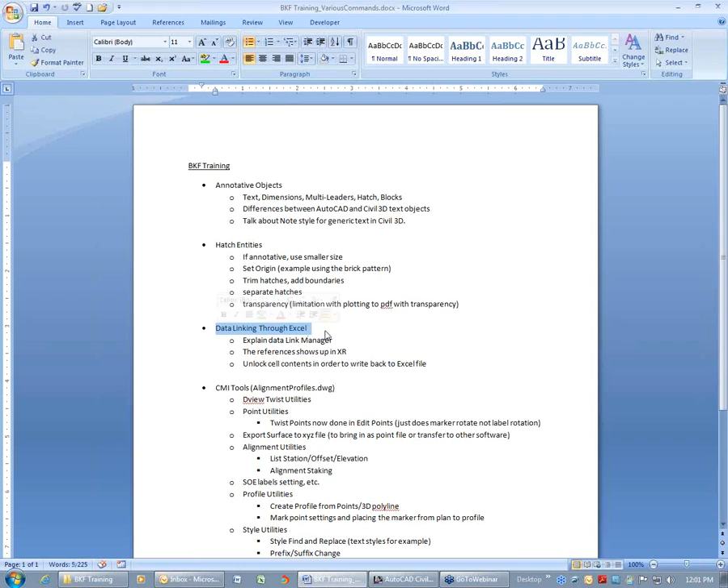Data linking through Excel, how to actually link an Excel file to AutoCAD—some people know how to do that, some people don't. And depending on time, we do have CMI tools and maybe even some dynamic blocks, though I'm pretty sure we won't get to that one.

But I want to mention CMI tools. This is CAD Masters Incorporated, what CMI stands for. We have our own tools that we write, and since BKF does buy the software from us, you get the software for free. It's an add-on to Civil 3D and AutoCAD. Just to point out, there is a CMI tools tab here. If you do not have this installed, don't hesitate to contact me and I can get the install to you so you can add it to your list. I believe you guys are using 2012, so it would be a different version—we're showing 2013 here today, but it's very similar to what it does for 2012 as well.

So shoot me an email, you guys know how to get in contact with me, and I will get you that install if you do not have it. There are just some nice utilities here that fill in some gaps, and I'll show you some of the stuff that might be useful to you.

But just to start out, I'm going to talk about annotative objects, meaning there are many different types. There's text, multi-leaders, hatches can be annotative, blocks can be annotative, and including hatch patterns can be annotative. What annotative means is that the object can actually scale itself depending on the viewport's scale.

So instead of having to have—the biggest topic I see is dimension styles. A lot of companies have standard dimension styles, and they have dimension styles for each scale that they need. What the annotative object does for you is you can have one style now and not have to worry so much about maintaining so many different styles.

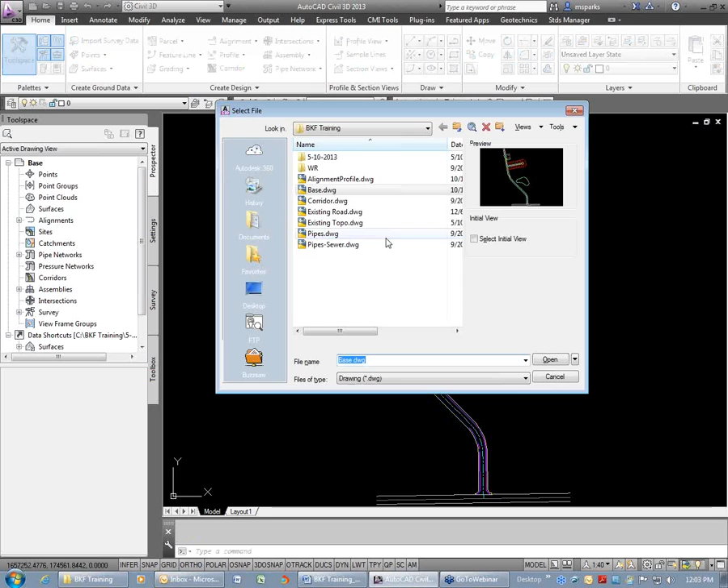But the annotative side is a little different on how it works between AutoCAD and Civil 3D. In Civil 3D, the text is automatically annotative. I should have opened another drawing that had some Civil 3D text in it—what I mean by annotative is the size of this text and the labels depends on this, which is the annotative scale. They'll automatically update based on whatever scale you have set. In Civil 3D, this is automatic—you have no option, it's going to do this whether you like it or not.

In AutoCAD, you have a different scenario—you have some options as far as being annotative or not. So we're going to talk a little bit about why the annotative scale can be useful and why sometimes it can be confusing, so hopefully this is a nice brush up for you guys. What we're going to do is just put some basic text in here, based on the style of the text.

So text style, multi-leader style, and dimension style all have this annotative option. So what I'm going to do is create a new style. I'm just going to call it anno for annotative. And as far as the text style goes, I'm going to just check the box here for annotative. The only thing that this does differently than regular text, you see here it says height, but if I go to annotative, it says paper text height.

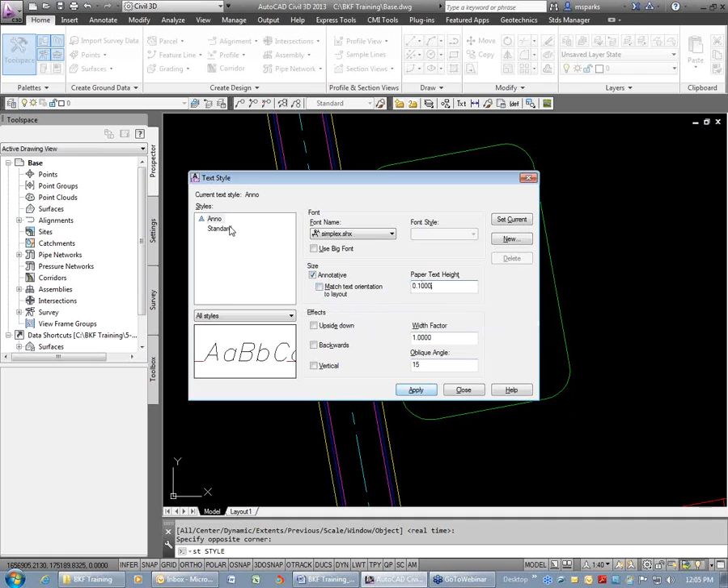So the difference here is you set the height you want to be on paper and let the annotative scale determine how big the actual text is. Okay. So for now, I'm just going to put it at 0.1. Many companies are different, maybe 0.125 size on paper. So 0.1 inches on paper is what we're going to set that to. We are also going to talk in a minute about this match text orientation to layout and what that does. So for now, just setting a text style that is annotative.

Okay. So if you use an annotative style, if you're just doing regular AutoCAD text, remember this is not Civil 3D text, just AutoCAD text, like maybe for details, or there's always some text that you need to put in there. This kind of text is determined based on the annotative scale. So before you do the text, you've got to make sure what scale you want to use. For now, I'm just going to set it to 40. I'm not too worried about it. And I'm going to go ahead and place some text in here.

Okay. Notice here when I did the text, it automatically knew what size the text is supposed to be. It's annotative, height's 4 because 1 to 40 is the scale, so it multiplies 40 times 0.1 to get the 4. So again, you don't have to worry about the size here. It automatically knows the size based on whatever scale you're doing. Now that's all fine and dandy. There are some caveats to that.

Well, what if you start the drawing and you think it's going to be 40 scale, but then it turns out to be 50 scale or 100 scale? What the annotative text can also do for you is make sure that you can see that same piece of text in multiple viewports at the correct size. If you have a viewport that's 1 to 40, it'll show at 0.1. But if you have another viewport at 1 to 100, you also want it to show at 0.1 inches, and it will do that, but it has to be annotative. Civil 3D will do that automatically, but AutoCAD does not. You have to do a couple of settings here.

Okay. Here's the deal with the AutoCAD side of annotative. Move that away a little bit. So you'll see here the text is annotative. Yes, the annotative scale is 40. If I click on this, you'll see that there are little 3 dots. This is in properties.

So the way that AutoCAD works is in order to see it in multiple scales, you have to assign that scale to the object. So if you want to see this in 20 scale, 40 scale, and 100 scale, you would have to add those scales. Okay? So I'm just going to go ahead and do this manually. I'm going to add 20 scale, and I'm also going to add 100 scale.

So these 3 are part of this object. Okay? So I'm going to hit OK. I don't know if you notice now that the text decreased in size. It's now at the 20 scale. Okay? So now if I go back to 40, you'll see it's the right size. If I go to 100, it's the correct size. Go back to 20, it's the correct size it's going to be on paper.

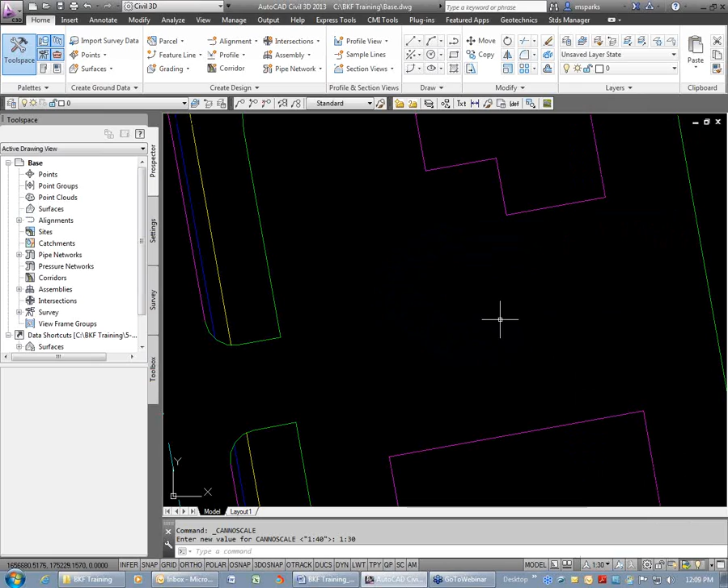So in order for the AutoCAD annotative to work, you have to assign multiple scales to the object if you want to show them in different scales. Okay. Same thing here. This is going to be turned off now, and if I go to 100, looks great. 40 looks great. Now all of a sudden, if I go to 30, 30 is not in the list, and that's why it's just not displayed because this has been turned off. If 30 is not in the list and this is turned on, it will show in the closest scale to it, but it's not going to be the correct one.

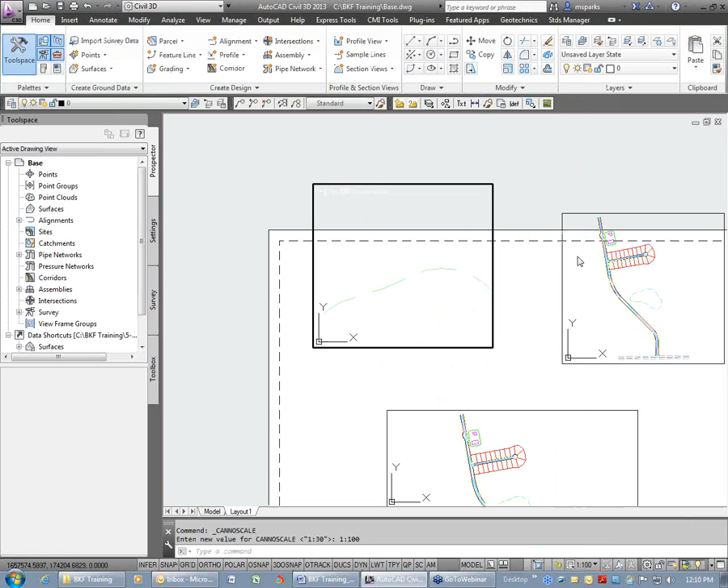Okay. So again, in properties, whatever annotative objects you have, you have to assign different scales to that. Okay. So again, I have 20, 40, and 100. So what should happen, if I go to my layout here, it's just a paper space, ignore that there's a sheet there, I'm going to create some viewports. In this viewport, I'm going to make 1 to 100. Probably want to zoom into this guy here, 1 to 100. Okay. This one over here, I'm going to make it 1 to 40. Of course.

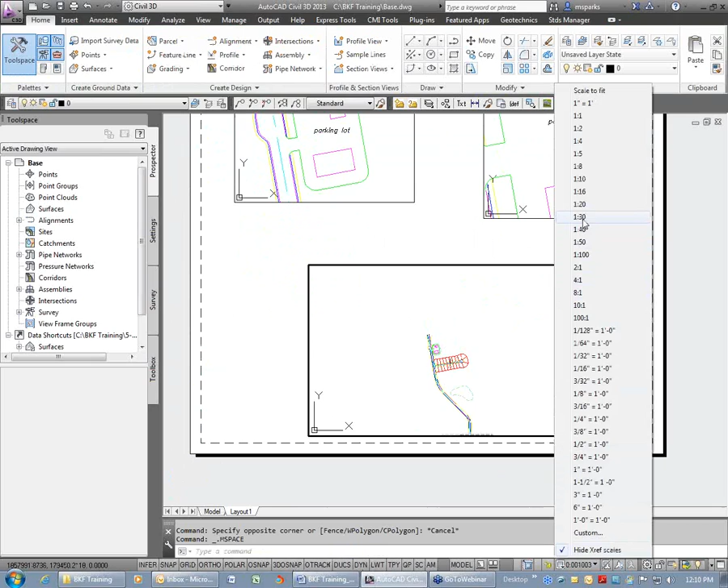So what you should notice, hopefully, is the word parking lot is the same size, even though these are different scale viewports. That's 100. That's 40. And of course, I'm going to make, what did I say, 20, I think. Get this in there. 1 to 20. Okay.

So this gives you the opportunity in the same sheet or the same drawing, if you have multiple layout tabs or what have you, the same piece of text can be in multiple viewports at different scales. Okay? And so that way you don't have to duplicate the text. It used to be, before this existed, if you wanted to have the same piece of text in different scale viewports, you'd have to put them on different layers and then freeze and thaw in current viewport. Now at this point, all you have to do is make sure that the correct scales are assigned to the object. Okay? All right, so I'm going to go back to Model.

Now, a couple of things here as well. So this button right here that I already showed you was Annotation Visibility. It will only display the text if one of the scales exists in that. That's what this button does. Okay? So if you receive a drawing and there's supposed to be text on there and you don't see it, you might want to try to check this one immediately to see if there's actually text in there that's just at the wrong scale.

Now this button over here is automatically add scales when the annotative objects change. So if this is on and I change the scale, it automatically adds to it. For example, remember this only has 1 to 20, 1 to 40, 1 to 100. If I go through and actually change it, let's say 1 to 10 now, 1 to 10 didn't exist in there, but notice it added it. So with it on, if I look at my properties again, my annotative scale, it got added to the list. Okay? So of course I can manually delete it if I want to as well.

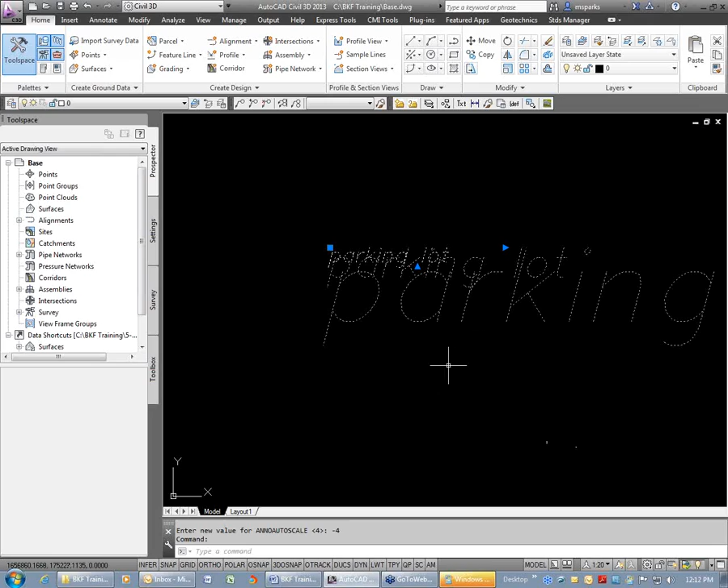So if I have a drawing with nothing but text in it, hundreds of thousands of pieces of text, and they all have 8 scales assigned to each one, the drawing's going to be quite a bit bigger. So you kind of want to limit the amount of scales you have on each piece of text just for speed and for size of the drawing.

Okay. But one thing that AutoCAD annotative objects have differently to Civil 3D objects is there's actually this echo. And what I mean by that, let's say, for example, I'm going to go to the 100 scale one. So here's the text for the 100 scale. Usually in larger scales, the text is bigger, and sometimes they get overrun. But maybe in the 10 scale, it doesn't. Let me show you what I'm talking about.

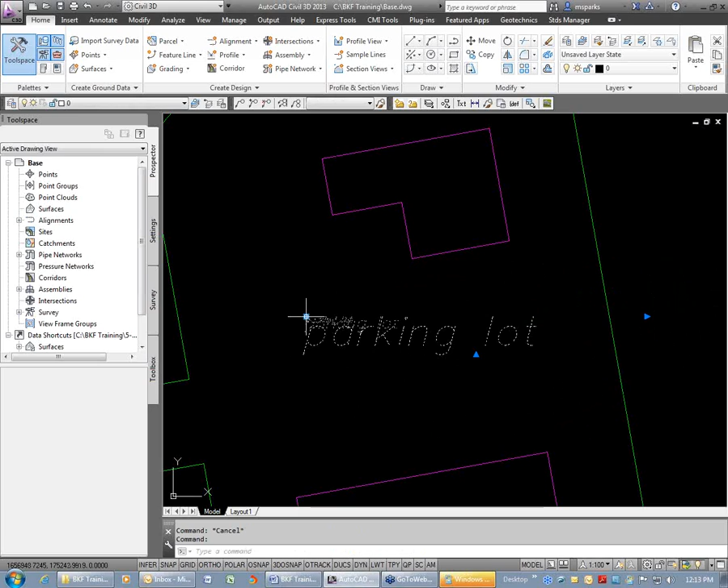So in this one, my current scale is 100. I can actually move this text independently of the other scales. If I use the move command, AutoCAD move, the whole thing moves. But if I use grips now, I'm only moving one of them. So if I say I want this one actually over here now, notice the echoes are still over here. So if I go back to my 40 scale, it's over here. 20 scale over here, but 100 scale I moved with my grip over to here.

The reason why that's useful is, again, larger text sometimes overrides something. You need to move just that one a little bit, but the other one you can't. I do wish that Civil 3D could do that, but it doesn't do that. It's all one object. So there's a little difference there between the annotative object and the Civil 3D label.

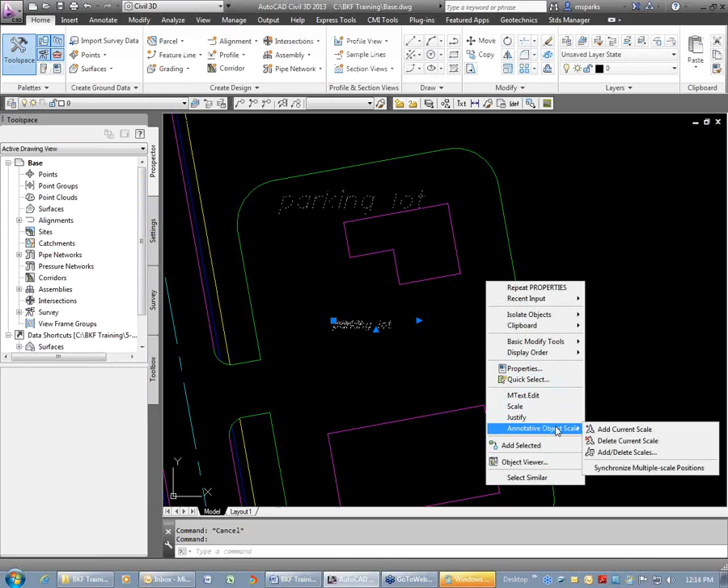Okay. So again, if I want them back, there's a couple other things I can do here. Let me go back to 40 scale. I'm going to click on this one, and I was showing you in here the properties where I can change the scales. There's some other things that I can do. If I click and then I right-click, there's some options in here for annotative object scale in the right-click menu, where I can add current scale, delete, and add/delete. If I go to add or delete scales, it gets me to this box like I showed you before. So a lot of times I'll click and right-click to get to that same section.

But this is the one I want to show you, the synchronize multiple scale positions. Since I've now moved this differently, let's just do this here. On the 40 scale, I'll move this over here. So if I go to 20 scale, it's here. 40 scale there. And of course, 100 scale way on yonder. If I want to move them back together, synchronize their position is what AutoCAD calls it. Whatever my current scale is, that's where it's going to synchronize to.

So let's say I'm going to go to my 40 scale, and I want them all to come back to here. I'm going to click on it, right-click, annotative object scale, and synchronize multiple scale positions. So you see all 3 of them are back to where my current scale was. So again, if I physically move it, see how they all moved? But then if I click and use the grip, only one of them moves. So you have some nice options there to deal with all these scales.

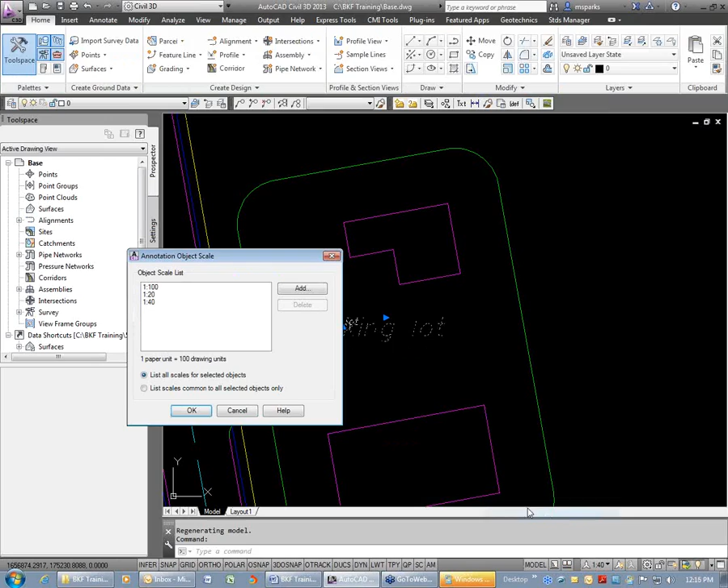So of course I'm moving this around, and in my layout tab hopefully all the text will be the correct size. Now one thing that I do notice as well is, let me go back into here. I'm going to delete my 100 scale from the object list. So now only 20 and 40 exist. So now you can kind of see what's happening here is I don't see it in that viewport because 100 scale doesn't exist. If I want to see it in Paperspace, you might notice here, if I go to my model, these two checkboxes that I've already showed you, and layout, they're also here as well.

So if I wanted to see it in my viewport, I have to turn this on. But notice it's the wrong size. It's not 100 scale because the 100 scale doesn't exist for that object. So as you can see, the theory here with AutoCAD annotative objects is you have to assign the scales to the object in order for it to scale correctly in the viewport. So if I notice that, I can come into this thing, right-click, add current scale, and now I have it because it's in the 100 scale viewport.

So there's a couple different things that I can do to get it to look correctly. Now again, I would say 90–95% of the time when you're plotting, you really only have one scale. But that other 10% gives you the option now to have the same piece of text in multiple scales showing correctly. Now also, text that is annotative does do the same thing through an X-reference. So if you X-reference some text and it has different scales assigned to it, it will also scale correctly as well.

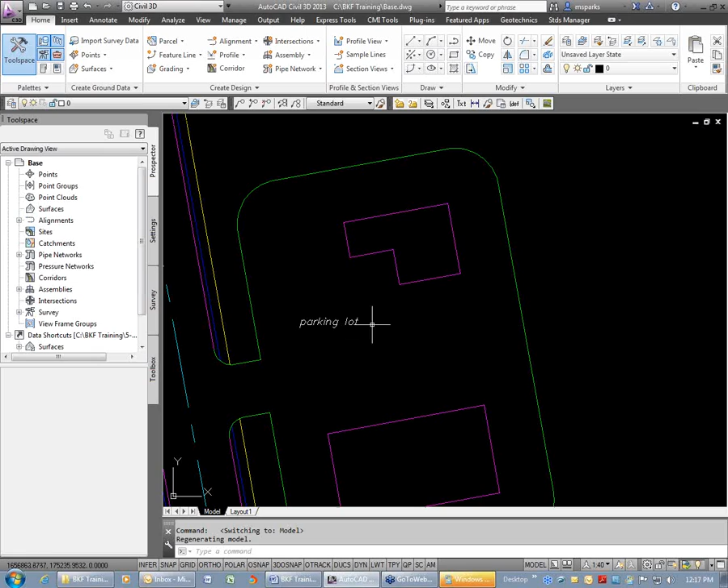Okay. So with that theory, all the different annotative objects, being text, multi-leaders, dimension styles, hatches, and blocks, they can all be annotative. They all have the same kind of properties. Okay, for example, let me do dimensions really fast here. Looks like there's the style already that's annotative. Anytime you see that little icon, it's actually the cross section of a scale ruler. That's what that thing is. So anytime you see that thing, that means it's an annotative style. Right? Went back to my style here. The anno is annotative, but standard is not. See that? Okay.

Now, what I'm also going to do here, I'm going to create a new style. I'm going to call it anno rotate. With anno rotate, everything's going to be the same, except I'm going to use this little match text orientation to layout. When that's checked, what that does is it automatically makes the text horizontal if you use a DView twist or a UCS when you rotate your viewport. Not all the time you're going to want that to happen. So that's why I typically would have two styles, one that doesn't do that and then one that does.

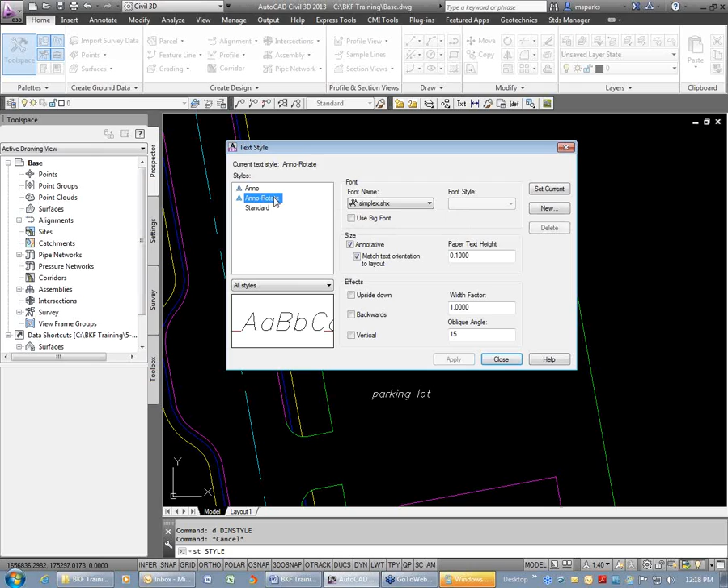Okay. So in this case, I'm going to do another piece of text. I'm going to call it parking lot rotate. And I'm going to do the same thing that I did with the other one, I'm going to go ahead and add those scales. So 40, 20, and 100. So I'm going to add those three again. And just to be ridiculous here, I'm going to rotate this one. Oops. 45 degrees. Oh. I just rotated it 45 degrees, but I was going to rotate my viewport. I was doing that example into oblivion there. So you can see that it's actually rotated, but it's horizontal. Okay. Here, let me undo that. Okay. So I don't rotate it.

But now I'm going to come to my layout tab, and I'm going to go ahead and rotate these guys. Okay. I'm going to use DView twist. Some people use UCS, but I'm just going to use DView. Okay. So the parking lot word was not rotated to the viewport, but this one is. You see here I've rotated just 45 degrees. So you can have text that also rotates. Now keep in mind, Civil 3D does something similar to this. The difference here is you have to set up the style to do this. So we're going to show you that here in a minute. So again, with the text styles, you can have it rotate to that as well.

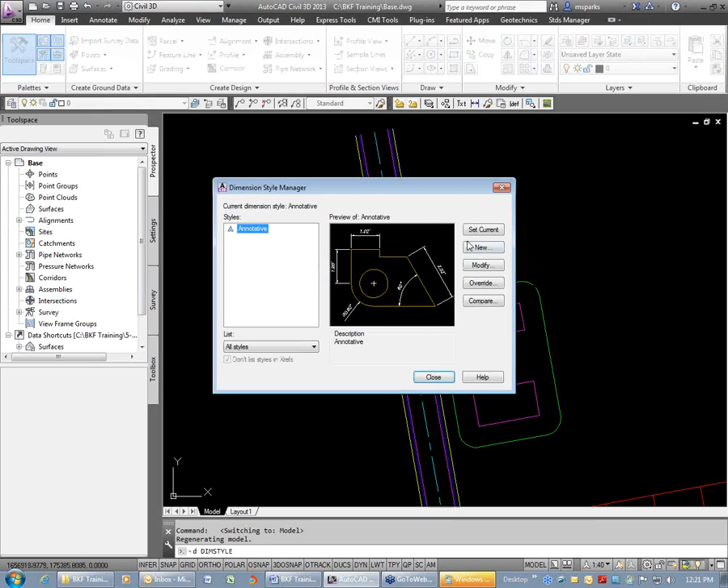All right. So again, what I typically recommend is on the dimension styles that I only have 2 dimension styles, one for decimal and then one for architectural. And I don't have to have different dimension styles for each scale. So same kind of thing. I'm just going to do this briefly here. I'm going to go ahead and make a new one, call it decimal, and make it annotative. So now all the size in here is sized on paper. I'm not going to worry too much about that other than decimal, everything looks good. The only thing I'm going to do is make sure it's annotative. Of course, I don't want to go over every last setting in here. That's fine.

So now, instead of having to know what scale you are, as far as what style you have, a lot of people have like decimal 10 or decimal 20 or decimal 100 for the different scales. Now you have one, and it's annotative. So whatever my current scale is, which happens to be 1 to 40, I will do a dimension. Okay, it's the right scale.

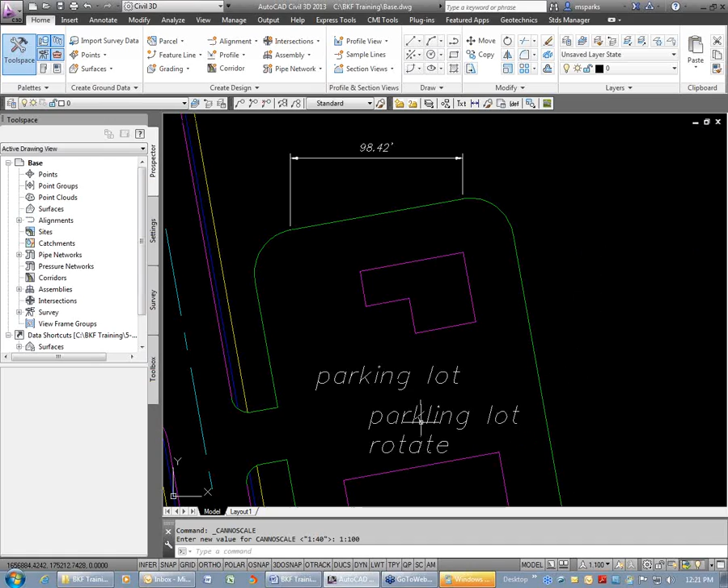If I go through and change it to 1 to 100, these changed. This one didn't because the scale is not added. But if I do another dimension, it's the right size. Go back to 40. These don't change, and the reason for that is what I would have to do is grab both of these, add scale or delete scales, and make sure that 40 are both.

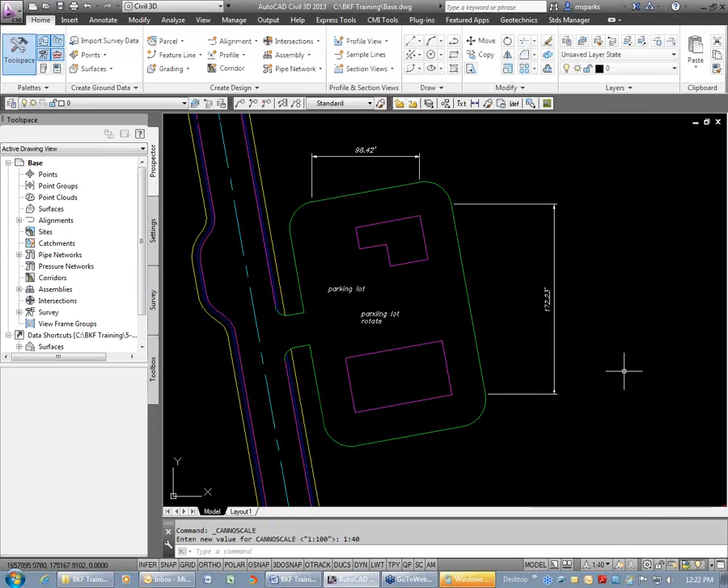Okay. Add 40. Add 100. I'm doing it at the same time because they're both checked. So now they should be good to go. So now if I go from 1 to 100, 1 to 40, they're automatically the correct size. So multileaders, dimension styles, text, as well as blocks can be annotative, and hatch patterns can also be annotative. We'll show you a little bit about that when we get to the hatch themselves. Okay.

So with that regard, as long as you're assigning the correct scales to these annotative objects, they're going to be the right size. And if you start the drawing at 40 scale and you're just doing 40 scale only, even though they're annotative, you don't need to add different scales. But later on, if instead of 1 to 40 it needs to be 1 to 50, it's pretty easy to change every single one of those to the correct size just by adding the scale.

So with annotative objects, you have the option of making sure you can have multiple scales of the same object, which you do not have that capability in regular AutoCAD text. So just that alone, I think, gives you the opportunity, even though you might not always use that, I still think annotative objects are the way to go.

Okay. Now, to compare that with Civil 3D, we'll kind of show you that as well. So again, I'm going to go change the drawing. These are just Civil 3D labels, which is different than AutoCAD text. So the difference here is that I do not have to assign different scales. It doesn't even matter anymore for those guys. But here, how do I make this rotate correctly, and how do I make these things look correctly in viewports is kind of the question here.

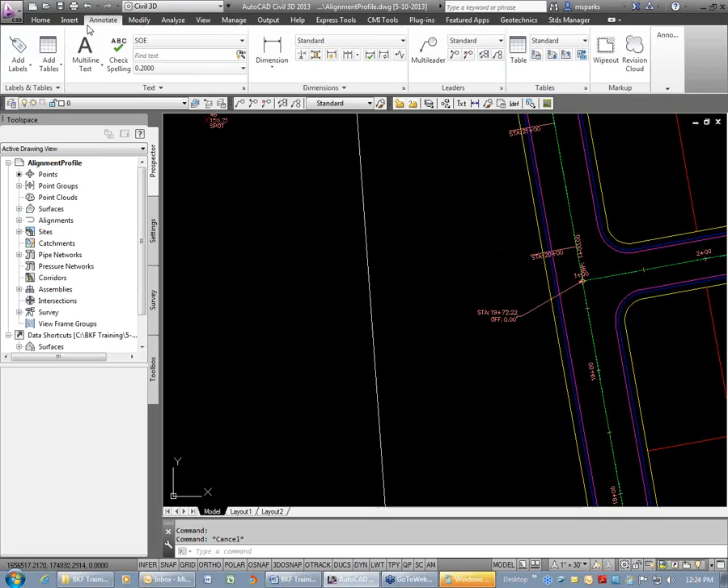So first thing I'm going to do is make what's called a note label. Many people may know about this, but just in case. If I just want to do simple text and not actually have it linked to an object, I can do that, and they're called notes. I'm going to add a note, and of course you can have different styles. I'm just going to use the one right out of the box. So I'm going to add a note style, and you can see it can be almost like a multileader.

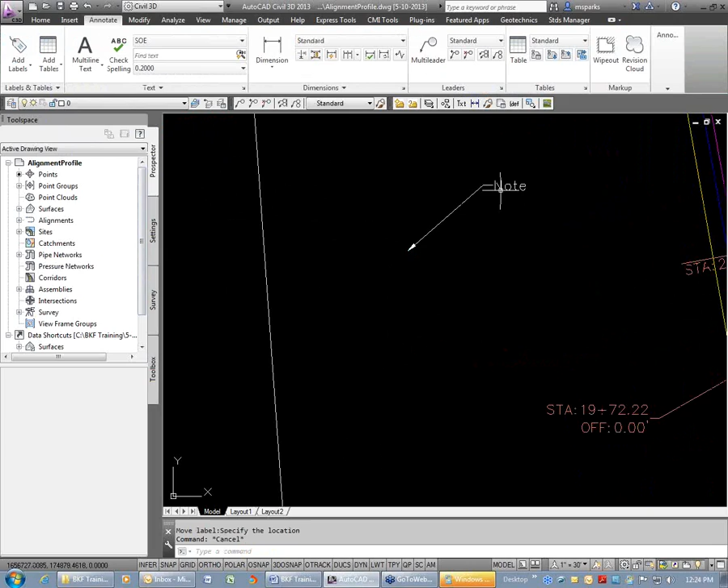And the way that it works is if you want a different piece of text in there, you have to edit the thing. So I got to click on it and edit the label text, call it whatever, add my parking lot to it. So now I have that. And where's my parking lot? There it is. Okay. Now, dealing with that style, depending on how I want it rotated or what have you,

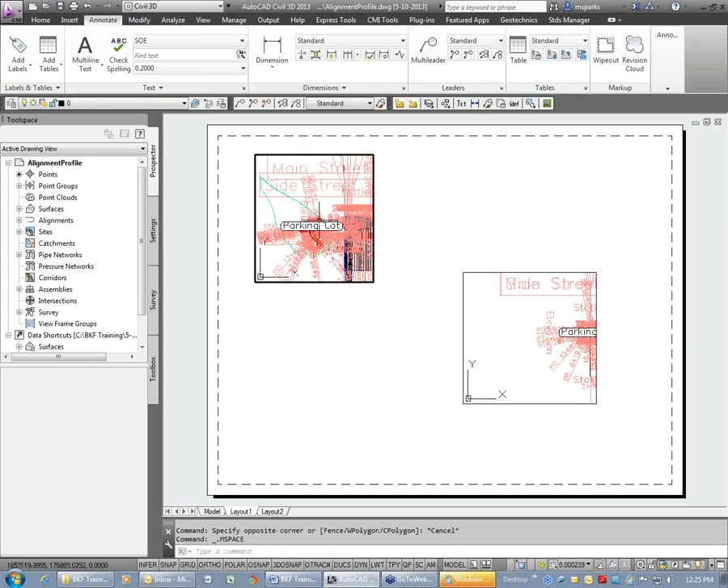I'm in a different drawing, so I'm going to create 2 different viewports. You might notice that the text is humongous in here. That's because all Civil 3D objects will rotate or will make the right size correctly depending on where you are. All I'm doing is zooming in and regenning, just to make sure I can see what the heck I'm doing. So I'm going to make this guy here 100 scale.

Okay. Same thing in here. Sometimes it's hard to find the stuff when you got so much text in there. Oh, there it is. And I'll make this one 40 scale.

So I just did a regen all so I could see that. Depending on what scale it is, here's the 40 scale, here's the 100 scale, text will be correct.

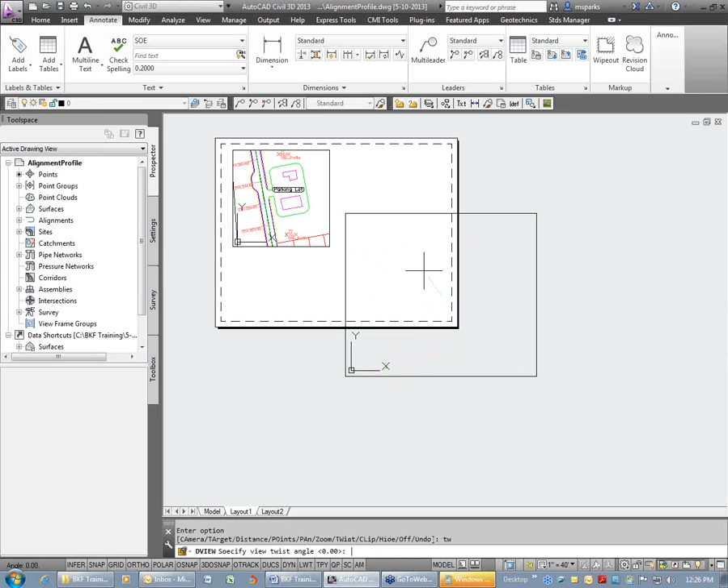Now if I want it rotated to that, I'm going to do the same thing here. I'm going to do a D-view twist of 49 degrees, whatever that is.

So in this particular style, it does not rotate. I need to show you, as far as the label styles go in Civil 3D, how you can actually have these rotate to horizontal in these viewports. So what I'm going to do is click on the actual object, and go up to Label Properties and Edit Label Style.

There's a general note, I'm going to go and edit the thing. This is going to be universal for all label styles, they all have this same property. We might have talked about this at the very beginning of the styles, but a little refresher course. The general tab shows what text style, layer, etc., but you'll see this behavior and plan readability.

The behavior is if I want it to rotate to a particular view, instead of setting it to object, I set it to view. If I set it to world coordinate system, it'll automatically always rotate to wherever X and Y are. But I'm going to go to view because I'm rotating the thing. So if I have it set to view, then it does rotate to the viewport. I'll hit OK.

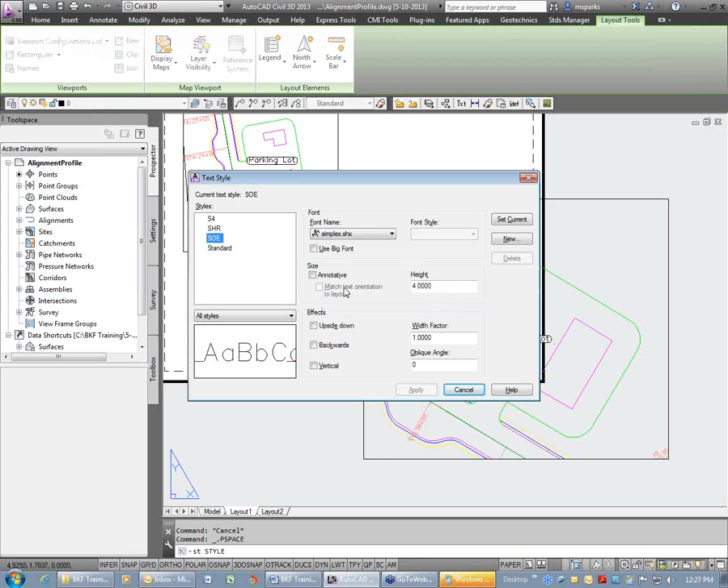And so now you can kind of see what's doing it over here. With AutoCAD, in the style, it determines whether it's annotative and matches the text orientation to layout based on style. Same thing in Civil 3D, the actual label style determines that. Again, in the Edit Label Style, in the General tab, this behavior determines the view.

Now, if this is anything other than view here, if it's object or world coordinate system, then the plan readability comes into play. I'm going to set it back to object. You'll see here it says plan readability true, and the readability bias is 110 degrees. I'll explain that in just a second.

So we're back to this thing here. In the viewport, I'm going to do another D-view twist at 105 degrees, I'll show you what happens. So D-view, twist, 105. Okay, notice at 105 degrees, you see how the parking lot is still rotated, and still reads that way.

So what the 110 degrees is designed to do is the minute you get to 100 or 90 degrees, you don't want it to flip. It gives a little bias to it, maybe another 20 degrees, and then it would. So if I do another D-view twist at 115 degrees, I'm outside of that 110 threshold. See how the parking lot word rotated.

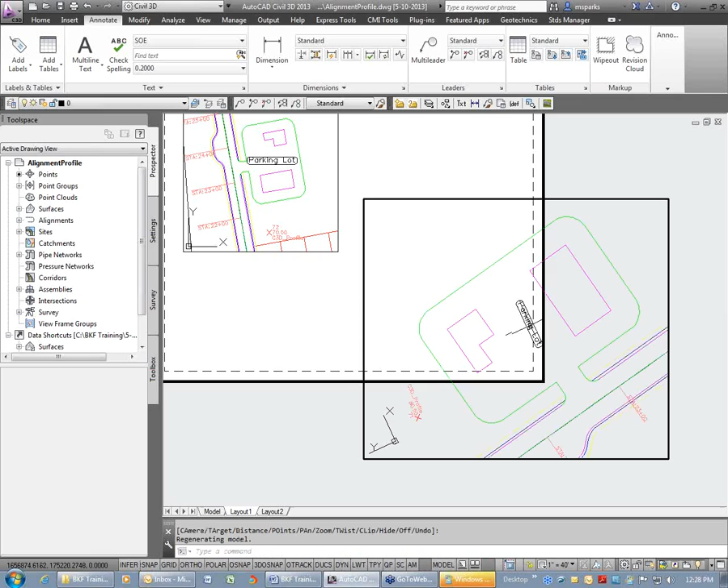So you have two options with Civil 3D that you do not have with AutoCAD. With Civil 3D, you can say I don't want it to rotate horizontal, but I do want it to make it read upright.

And this is a good time to talk about when you're doing contours and you have labels on the contours. I do a twist on my viewports quite a bit, and I want to make sure I can read the text on the contours, so make sure it's read upright based on the view. Civil 3D will automatically do that for you. AutoCAD will not, it'll only make it horizontal or not horizontal. And that's why these things rotated as well.

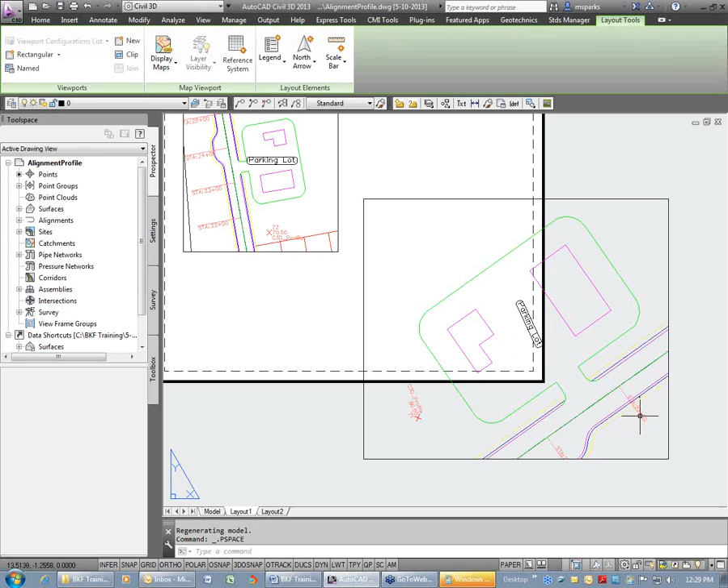This text over here is doing the same thing. See, over here it's this way, over here it's the other side. That's what that plan readability is. Just to reiterate one last time.

In the General tab, the behavior and the plan readability determine how it looks inside of a viewport. If I go to View, it'll be horizontal. If I have plan readability set to true, then it will rotate based on wherever north is for that particular viewport. So that's kind of the differences between AutoCAD text versus Civil 3D text, where these styles control those viewports a little bit differently.

So again, if I'm just doing AutoCAD text, I need to be concerned with my annotative scales, that's just AutoCAD side. With Civil 3D, there is no such thing as that, it's just going to do it automatically.

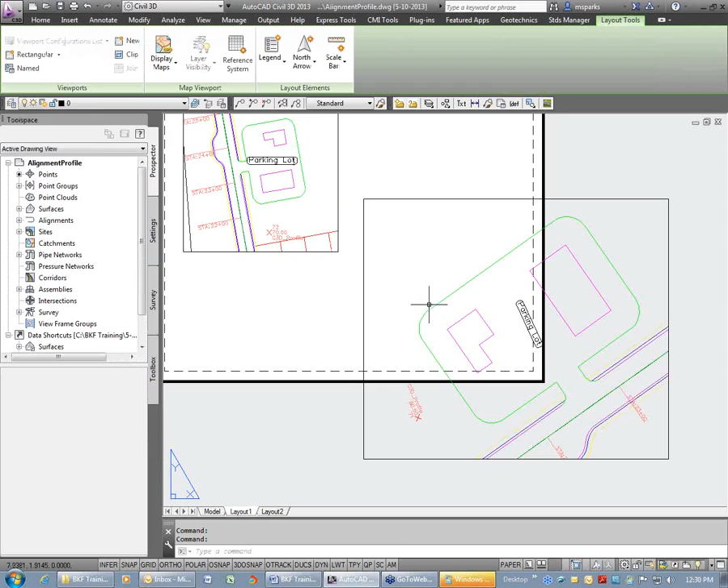Cool. All right, and so for all those different objects, whether it be dimension styles, multi-leader styles, etc., I typically recommend that you use annotative so you have that capability. Makes it a little easier, at least in my opinion, than having to deal with different styles for each scale.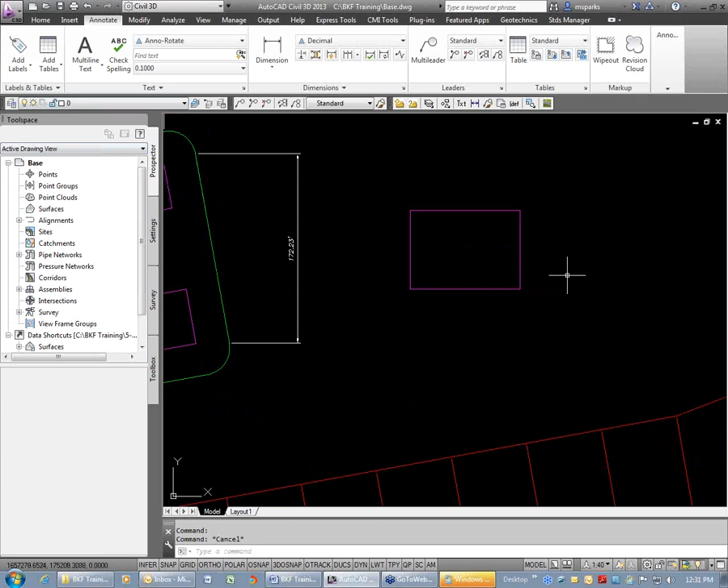So hatch patterns, of course, everybody knows that you can assign it to an object, or you can actually pick, what have you. So I'm going to go ahead and do a few examples, just to be brief about it. I'm just going to type in H for hatch, and then the ribbon pops up for that, where I can pick different boundaries over on this side. There's my pattern. There's some other things we're going to talk about as well.

You'll see here there's associative and there's also annotative. So like I was saying before, you can make hatch patterns annotative. So if you have a hatch pattern of concrete here, and that happens to be at different scales, the scale of the hatch pattern can actually react to what scale your viewport is. And that's what this is.

Okay, I'm going to pick a brick pattern here and make it, I don't know, 100. So you'll notice here as I hover over here, it should make it maybe 50. Okay, and I can do that either by pick points or I can select an object as well. So that's pretty self-explanatory, hopefully.

Now the reason why I wanted to point this out is now that I have that hatch pattern, I can do a few more things with it. Of course, I just click on it and I come back, and I can change what I want about that. But what I did want to show you, a lot of people might not have known, is if I'm doing a brick pattern, what if I want my brick to start at the bottom left-hand corner? That's where this comes in, where you can do this set origin, where instead of having the origin be 0,0, I can say I want it to be this corner. So you can see it shifts and calculates its hatch pattern based on that new origin.

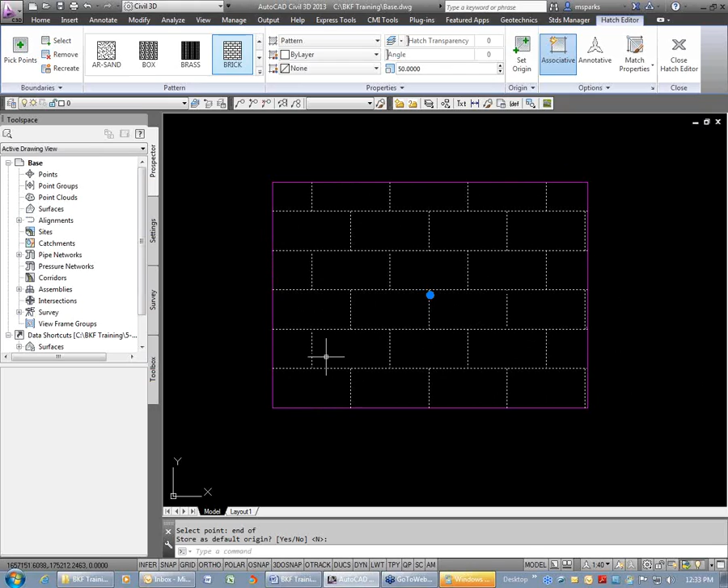So if you're trying to do brick, obviously that's a good example. If you're doing concrete, it's probably not going to matter that much. But a lot of people didn't know that there's that set origin capability. Okay.

Other things that you can do as well after the fact, if you want to create these as actual boundaries, you can add boundaries after the fact. Many people didn't know that. So if I click on that, you'll see there is this boundaries option where I can remove and recreate, or just recreate or select new boundaries, what have you. So if I hit select, I can grab these things as boundaries, now they're part of that. And of course, if I move this around, they should be linked now. So I can add stuff after the fact.

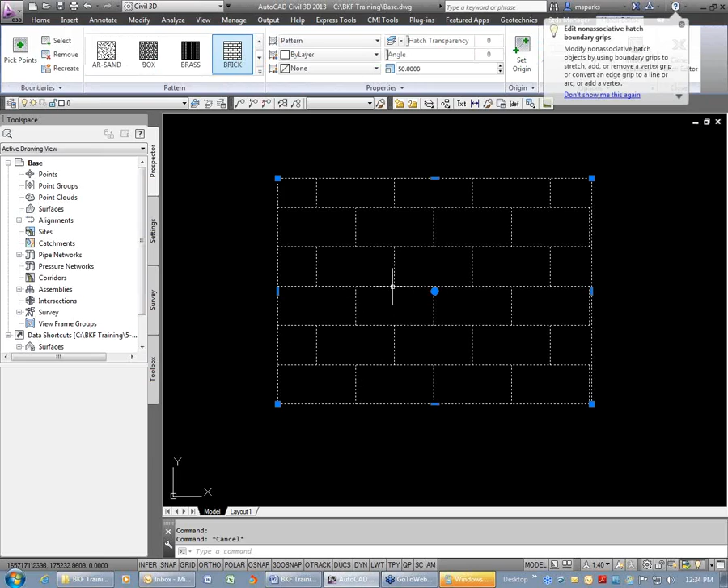And another thing I notice as well, okay, I'm just going to get rid of those for now. If I remove the boundary that was initially created, a lot of people think, well, now I can't really do anything with that. But I think this happened in 2012, the version you guys are currently using, where if I click on that, you see I still have the boundary, and I can still move stuff around, and the hatch is still valid. I can still do what I like to it. So that's kind of a nice little feature where I can come in and do that. So even though you might not have the boundary, it's still kind of what's called associative to itself, because there actually is a boundary there.

All right. Same thing as well, what you can also do with these guys, I can also trim a hatch pattern.

I don't know if you saw that. I was able to trim with that line. Now, since it's not associated anymore, that line doesn't actually do anything, but I can trim it as well. Can't extend it, but I can trim.

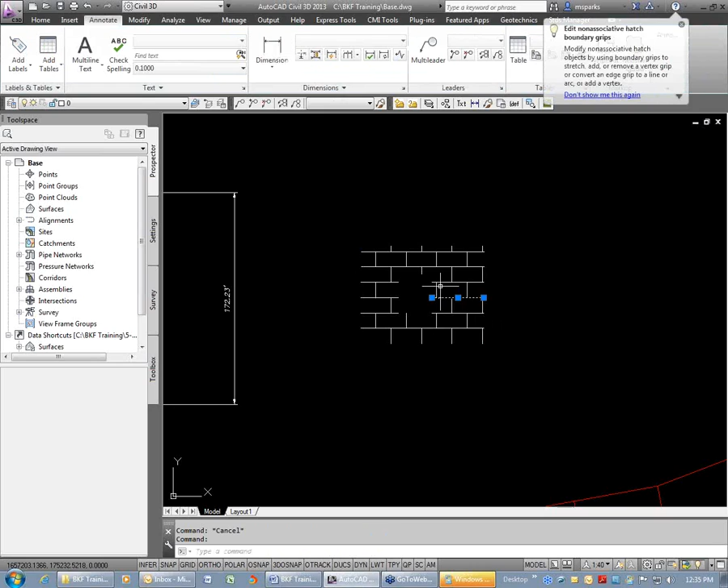So even if you don't have a boundary, you don't have to explode it and things like that to get to that. I can go back through that, make a rectangle, and I can trim a hatch pattern with just AutoCAD objects. You're not limited to the fact - I see a lot of people come in here, and it drives me crazy, explode the thing, and now it's just a bunch of lines. Don't have to anymore.

Alrighty, and last but not least, I'm going to be brief here. This is another one I see a lot. So I have 3 circles, and I want to create a hatch pattern for all 3 of these.

So I'm going to go to hatch. I'll use a different style this time - instead of brick, I don't know, ANSI. You'll notice here that I can go one at a time, but a lot of times what you can do here is hit select, and I can pick all 3 of these all at once. But notice it's all one hatch pattern.

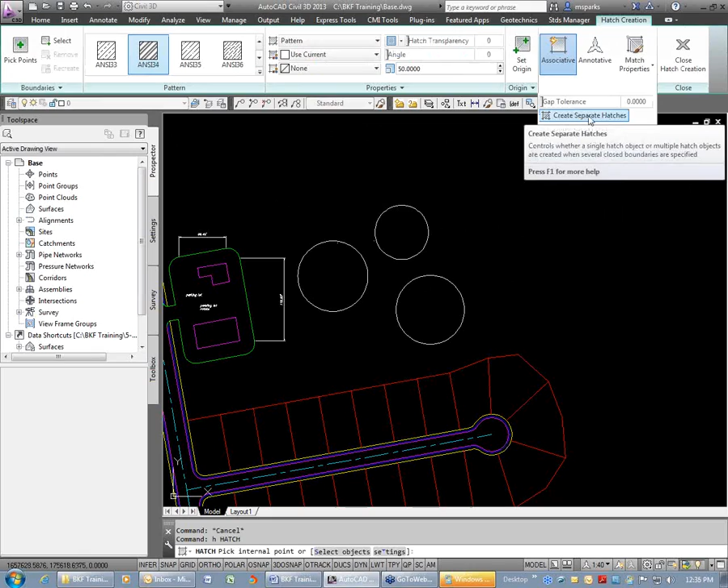Sometimes that's not desirable, sometimes it is. So instead of having to be one hatch pattern, I want it to be 3 separate. I want to get out and come in and out of that command. So when I go to the hatch, there is an option down here where it says create separate hatches. Now when I do my select, now they're separate. That way you don't have to go in and out or explode or do all that fun stuff that I see sometimes.

And just to make sure - I don't know if this is the case for sure, but I'm going to try it. I'm not going to create separate hatches this time. I'm going to see if you can change it to separate hatches after the fact. I don't know if you can. Yes, you can. I just wanted to make sure that was the case. So even if you don't have separate hatches, you can see that's one object. Once you click on it, you can edit the style, etc. But you can create the separate hatches after the fact as well.

All right, and last but not least on the hatch patterns, you can do a transparency. A lot of people might not have known that, but I'm going to show you. I'm going to do a hatch pattern here and make it transparent so I can see behind it. This is a good one where you want to highlight an area of an aerial photograph - it always happens, you try to do that, you can't see the photograph behind it. Well, now there's some other things you can do, like make it a sand pattern, make it really thin, or deal with draw order. But now with the transparency, you do have that option. But there's some caveats that I want to show you.

So I'm going to do a hatch, and this time I'm going to do a solid hatch. You see there's this hatch transparency here. You can also do a transparency on a layer or an object itself, but I'm doing it on the hatch. I'm going to make it 75%, and I'm going to pick it. So this object is supposed to be 75% transparent, and the reason why you're not seeing that is because it's not invoked in this drawing. So this little TPY down here, show and hide transparency, will only show you how it displays in the drawing. So now I click on that, and hopefully you can see behind that.

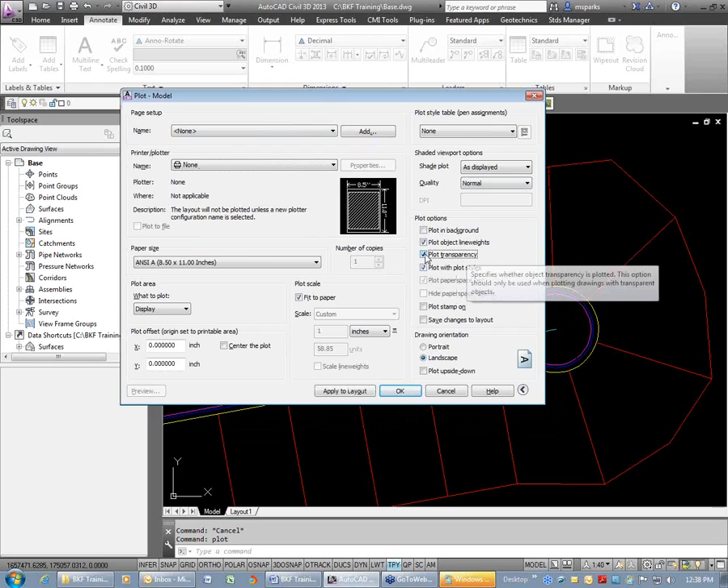On the hatch transparency, it will plot that way. That's the first question I always get, but I want to make sure you guys understand: when you go to plot, you must make sure that the plot transparency is turned on for it to plot that way. So it does not matter in the drawing whether this is on or off if you need to plot - this can be off like this and it can still plot correctly. This is just how it displays in the drawing. In order for it to plot, you have to have that checked.

All right, so get back to the questions. First of all, generate a polyline from hatch without a boundary. There's a question for that. Yes, you can do that. Let me do another one over here. So solid, you can do the same thing, but question. Let me do a hatch. So again, the question is, can you generate a polyline from a hatch without a boundary? And yes, you can.

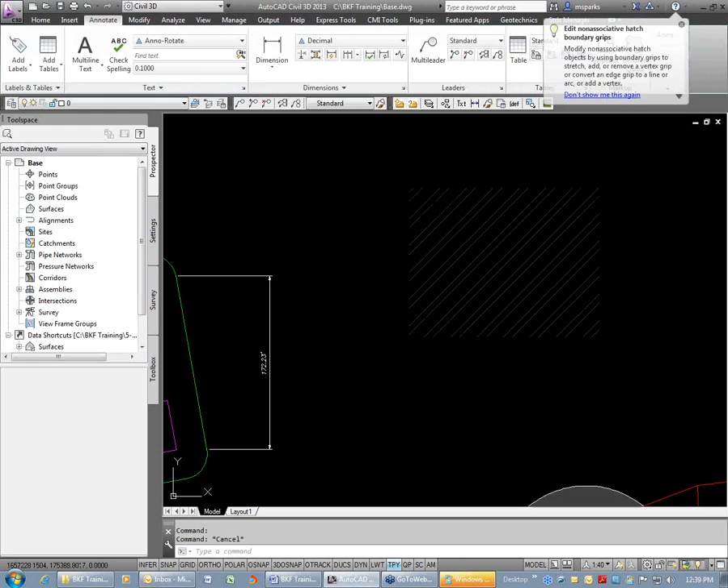Okay, so I have a hatch. Delete it. I don't have a boundary anymore. Okay. So in here, if I click on this guy, there's some options in here. Thought it was right in here, and I missed it. Do I have to go the old way? I think I might have to go the old way. I've done it a bunch of times, but I forgot where it was. Okay. Yeah. Oh, it's recreate. Sorry. So if I click on this object, I just didn't see that.

Recreates the boundary from the polyline region around it. So I can recreate that as a polyline or a region. I'll hit return for polyline. Associated with the new boundary, yes. So now I do have a polyline. And it actually is associated. So yeah, you can get that back. So question 1, there you go.

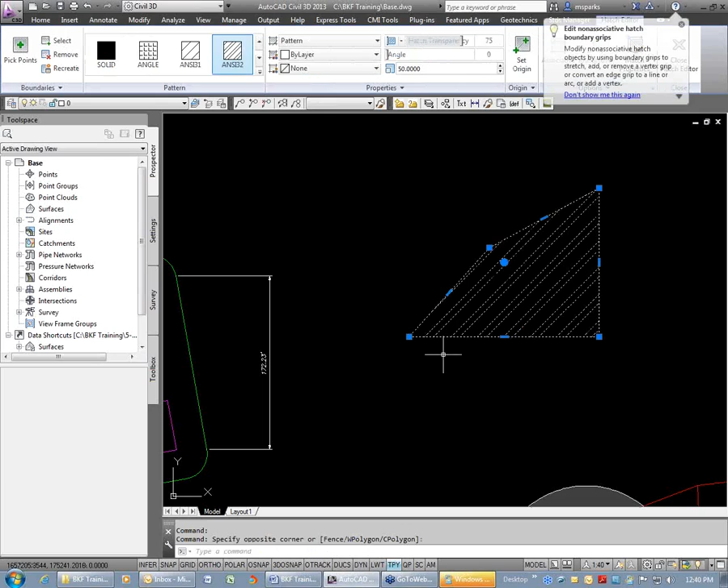And the second one is, can you make the hatch default command select instead of pick? Good question. I do not know if you can or not. So go to the hatch, pick internal point, or select objects. So if I select objects, hit return, back into the hatch command. Unfortunately, whoever asked that question, it does not look like you can do that. And I can realize why you'd like that, because if you move your mouse around on things in a large drawing, it gets very slow. So from what I see here, you cannot do that.

So my recommendation would be when you go to the hatch command, don't move your mouse down until you come up here to hit select, I guess. But I don't know if that's the best solution, but that's what I got for you. Sorry. Okay.

The other thing that I want to mention here is sometimes, depending on the PDF plotter, since a lot of people like to plot to a PDF, I want to show this caveat with solid hatch patterns in PDF. So let me just do something really fast here. I'm going to plot this to a PDF to show you what can happen on a transparent object. So window, do that. I go to the preview. Okay. I didn't heed my own advice. I didn't hit the plot transparency. So it looks great on the preview. But let me show you what happens when you plot it to a PDF.

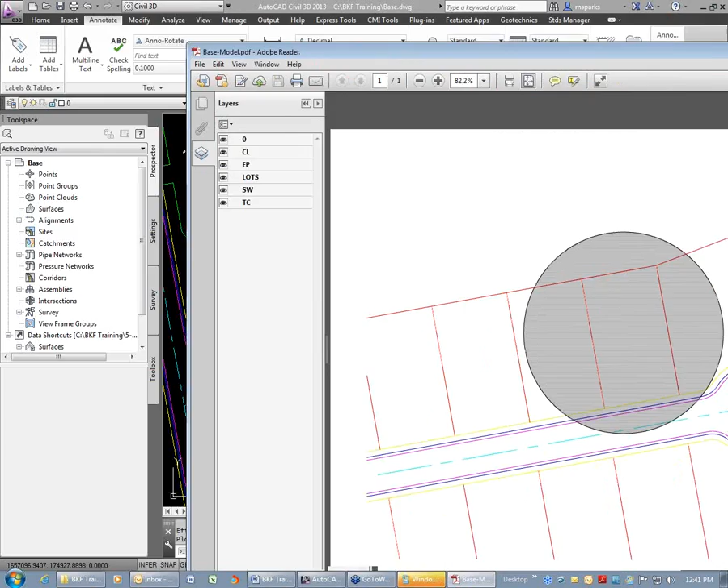Go to my desktop. Yeah. Oh, put it on my other side here. And this has been a known issue, and I'm not sure why it does this. I don't know if you can see the line work in there. It does this sometimes, but not other times. I've had better luck with certain drivers than other drivers, but I just want to mention, you see these little horizontal lines? That happens quite a bit on a solid hatch pattern that is transparent.

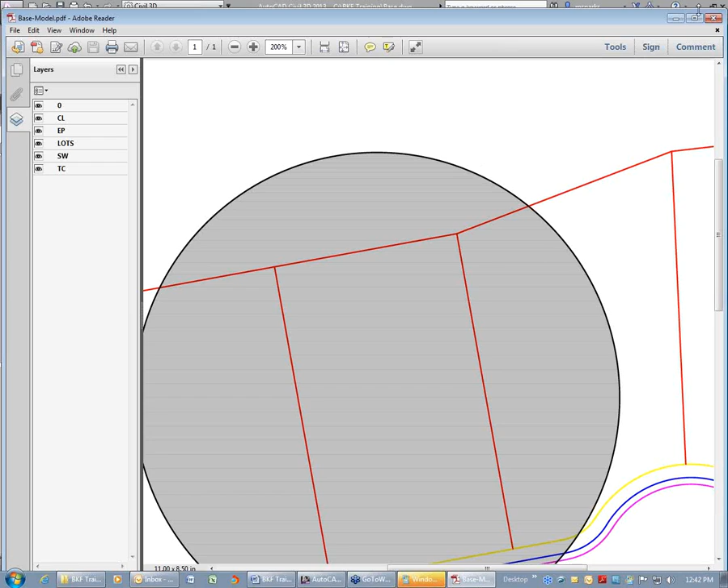Okay, so I just wanted to warn you, if you do a lot of PDF printing, the solid hatch does tend to do that. So I've had luck with Adobe, with the DWG to PDF that comes with the drawing. There's another one that's called CutePDF, C-U-T-E PDF, that's a free driver. I've had luck with that one too, but sometimes it does all of those. I just wanted to warn you about transparency on a solid hatch pattern. Okay.

All right. So let me just close out of here. Save. Maybe I won't close because I got to come back to that. You might have a question. Close out of this one.

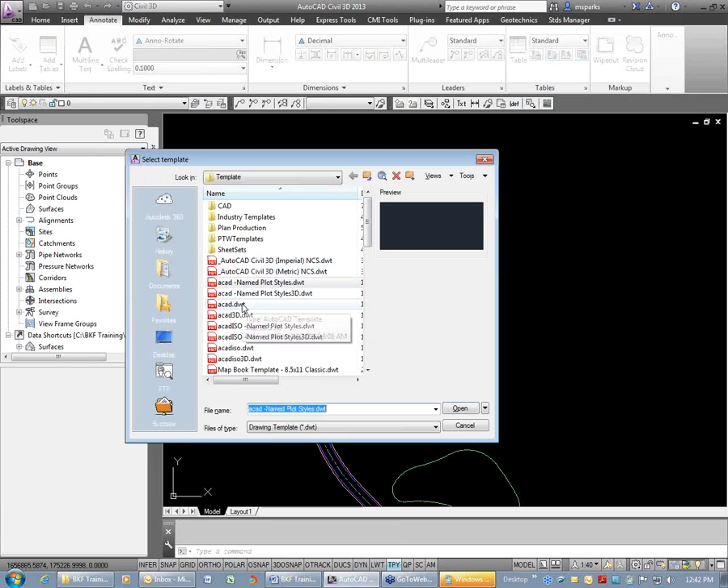All right, next topic. We got about 20 minutes left here, so I'll be quick with the data linking to Excel. So if I wanted to go ahead and link an Excel table to the drawing, there's a couple of different ways. And I'm going to do this in a new drawing just so it's blank, nothing in it. Okay.

Let me get rid of the stinking grid. And I have a couple of these, like for example, I'll do that one. That's fine. I'll do the pipe schedule. So I have a table in here that I've done in Excel. Okay, very simple. If I want to bring that into the drawing, there's a couple different ways.

Okay. Maybe I'll do a little fancier one. Maybe we'll do this one instead. Even fancier. Okay. Where I can actually have this linked, so if I change the Excel file, it also updates my drawing. Okay. So we're going to bring this one in, so I'm going to show you how this is done. It used to be where you had to copy and paste it to the drawing. It comes in as this big white blob. It's called an OLE object. Now this actually will come in as an AutoCAD entity.

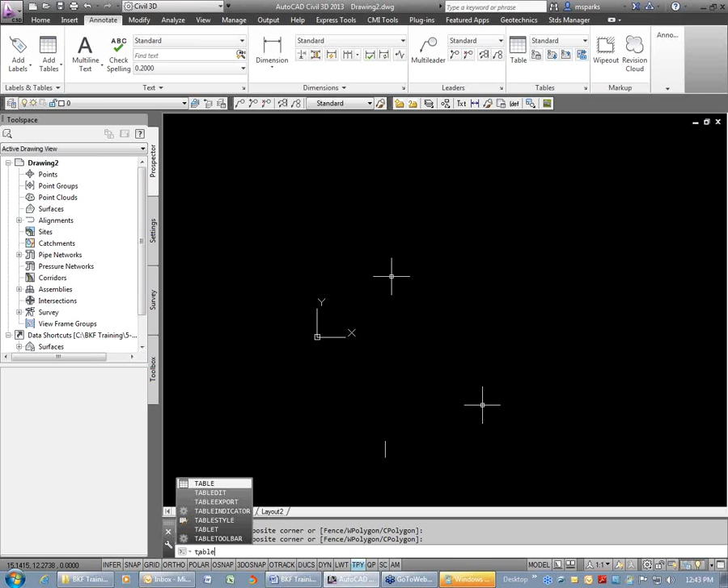So I'm just typing in table, and I'm going to create a table. But here you'll see there's from a data link, where I can actually link it to an Excel table. Okay? So I'm going to go from a data link instead of start from an empty. And I'm going to hit this little button here to launch the data link manager, so I can link it to an Excel spreadsheet. I'm going to call this one calcs.

And it's going to ask me to browse to a file. Do I want the full path, the relative path, no path? I'm going to do full path because I'm in a drawing that's not named yet. So it's very similar to your X reference. And there's the XLS file that I have I'm going to bring in.

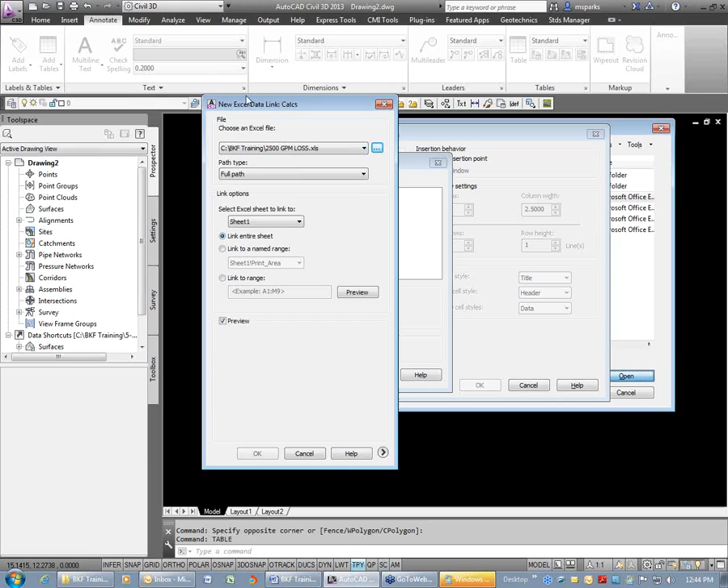And how you bring this in depends on these three checkboxes. If you want to bring in the entire sheet, if you want to link it to a named range, or a link to a specific range. A named range, you have to set that up in Excel. I guess I have a print area and that's it. I'm just going to go ahead and link it to the entire sheet. Okay. In addition to that, I have some other options. I'm going to hit this little arrow here. I love how they like to hide different options from you.

But in here, I can actually allow writing to the source. What that means is I can change it in AutoCAD and have it update my Excel file. But you might not want to allow that. I typically like to go from Excel back to AutoCAD, but there might be another option for that.

Other things is do you want to convert the formats to text, or do you want to keep the data in formulas so you can actually see the formulas in AutoCAD? I don't know if it really matters. I'm going to go ahead and set it to keep the data formats, but solve the formulas. Actually, I'll keep the data formats and formulas. What that'll do is I'll see the formulas that were done. There'll be like a field, and then I can see that.

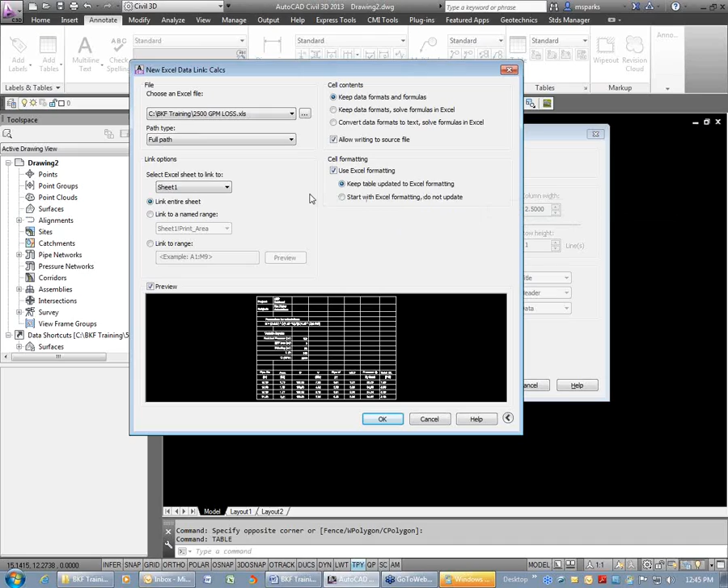Okay. And if I wanted to keep the data with Excel, if I have it set to this, I would change Excel, like a different font or different justification, things like that, and then it would update my AutoCAD. So it depends on how you want to work. I typically like to have everything stored in my Excel file and have it update in AutoCAD. That way I change it in one spot. Okay.

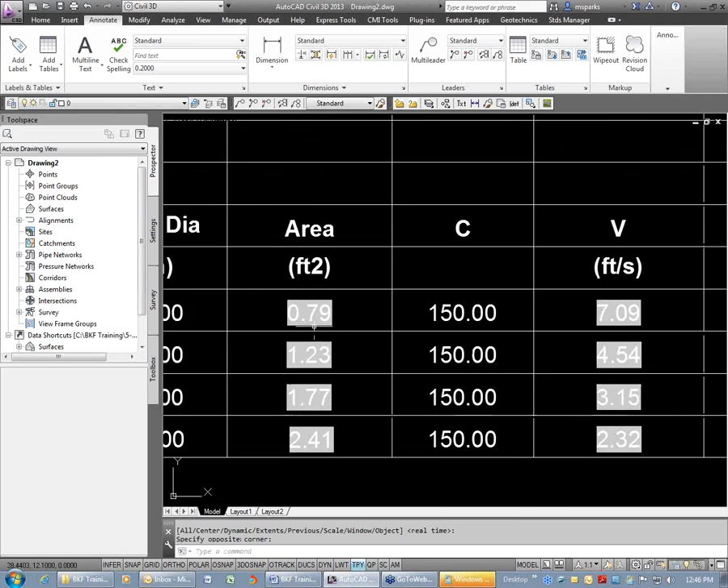So now that I have the calcs, it's got a nice little link. I'll hit OK. Instead of from an empty table, it's going to grab it from calcs. I hit OK, and now, depending on whatever my style is, there is my table. So you can see the ones that are gray. The ones that are gray, it means that they're coming from a calc. The gray won't plot, but it's just kind of giving you an eye just to see what it is, right?

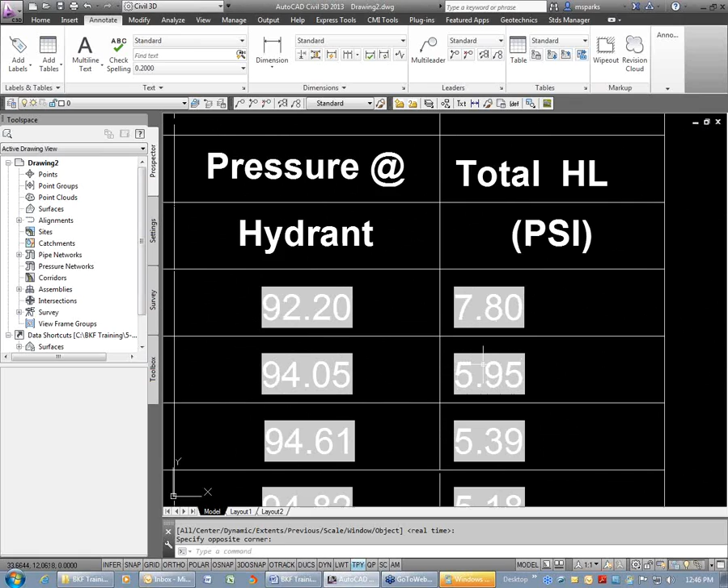So to give you an example here, I'm going to change a few things just to kind of show you what happens. So I'm going to go back and change this from Excel and show you how this updates. One thing that you can note here, you now have this little data link, where I can right-click and go to my links and update all links if I need to, very similar to an Excel file. This did not exist until I had a link in the drawing.

What also happens is now that this link is here, it does show up in your X-Reference dialog box. And I got to get to it. It's over here. One second. Oops. I have so many windows open here, it's hard for me to grab it. There it is. Okay.

See, it actually shows you that you have an Excel link and where it's located, etc. So if you need to change where it is, you can do that very similar to what you would do in an X-Reference. But see, now I have the link. Once I change it in Excel, how do I update it? Okay. Let me go back to this guy here.

And for my Q here, I'm going to change it to 2000, which you might notice all these things change, right? The pressure is PSI, I make it 80, so you can kind of see things are updating as I go. As I change this, if I go ahead and save this,

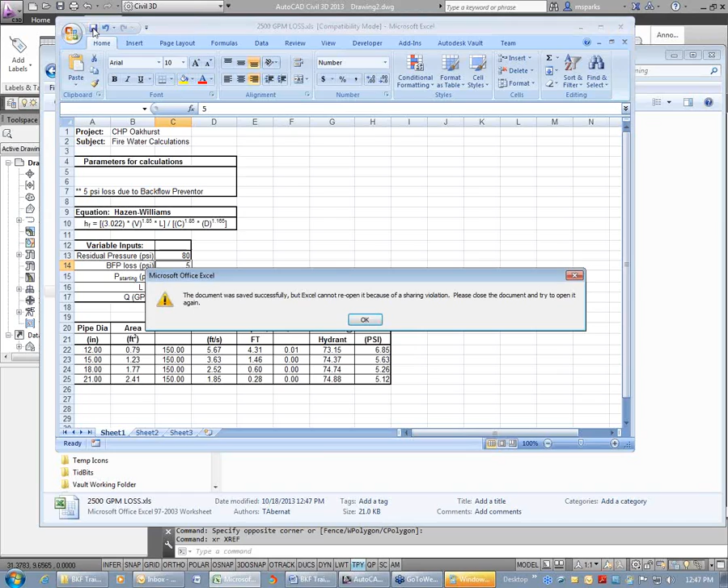I've opened it twice, have I not? Nice. I must have opened it twice. No, I don't restart my computer.

So what should happen is if you're in it, it'll say if you want to update it. If this didn't happen, when you open the drawing the next time it updates, or I can right-click and update all data links. Okay. So you can see it goes back and now it changes. So you can see very quickly I can have this link to an Excel file, change my Excel, and have it update exactly how I want it.

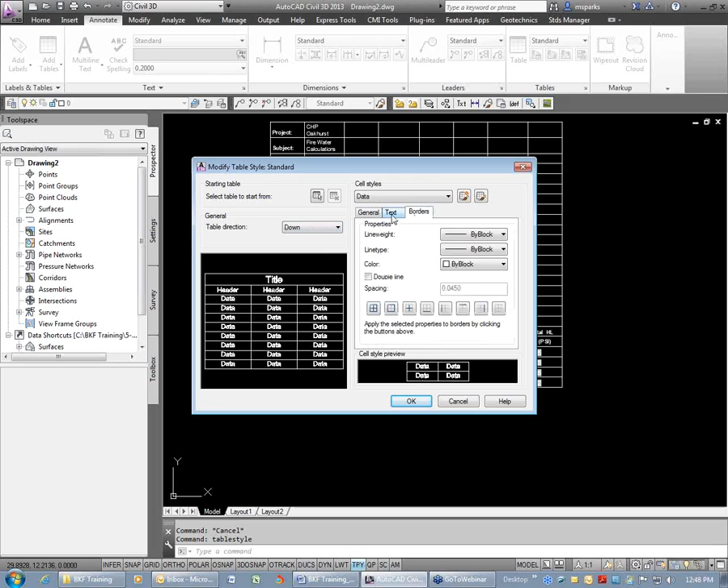Now, depending on how you have the table style, if you want to show the lines, etc., the table style will actually control that. Just to show you really briefly, I'm not going to go too much into it, but it's using the standard style, and I can modify that style for, do I want to show these labels, or do I want to even show what text styles, etc. It's all controlled by that. If I don't want to show the borders, I don't have to. Okay, things like that.

But you'll see here, the way that you know it's linked, if I click on this guy, you'll notice in here, if I just hover over something, see it's got a little lock on it, it even tells me that it's linked somewhere and where it's located. So if I wanted to update from AutoCAD to Excel, what I'm going to do is I'm going to grab this guy, I'm going to right-click, and I'm going to have to unlock it first.

Where are we? There it is. I was blind there for a second. So locking, I'm going to go unlock the cell. Now I can go ahead and come into this and edit that. So if I want to move this to 2850, whatever it is, okay, I change in the drawing, but now I have to update my Excel file. So it's not automatic like it was going from Excel to AutoCAD.

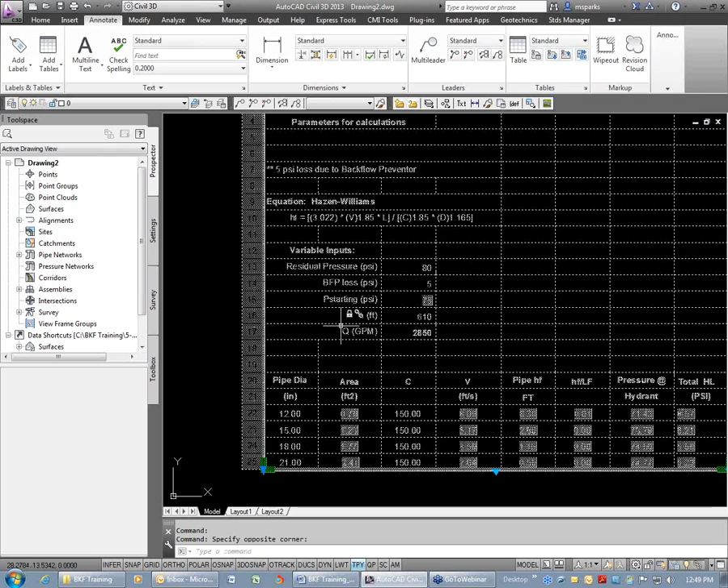If I want to update my Excel file, I'm going to click on the table, right-click, and say Write Data Links to External Source. So you can see it's going through the little thing. Okay. I'm going to go and open the thing just to make sure that I'm not blowing smoke here. See, now it's 2850. Okay.

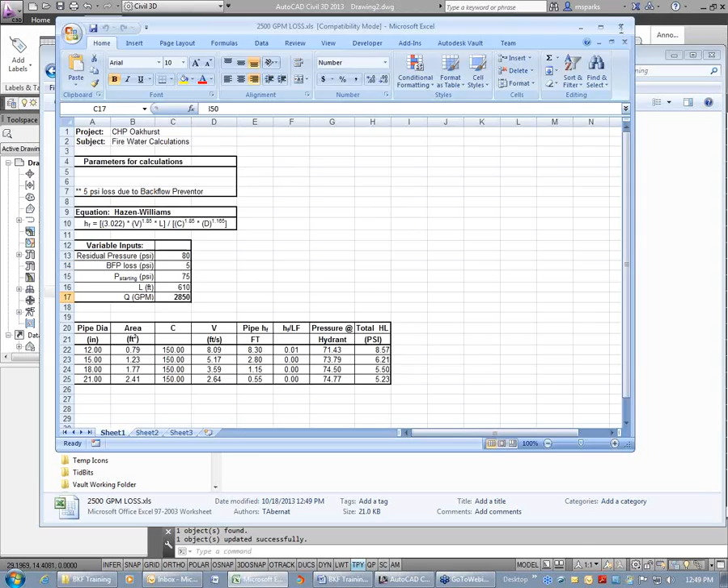So you can have a dual link between AutoCAD and Excel, but have it be AutoCAD entities so it plots correctly, and you can move it and deal with the styles a lot better than you could otherwise. Okay. So that's kind of a nice feature as well.

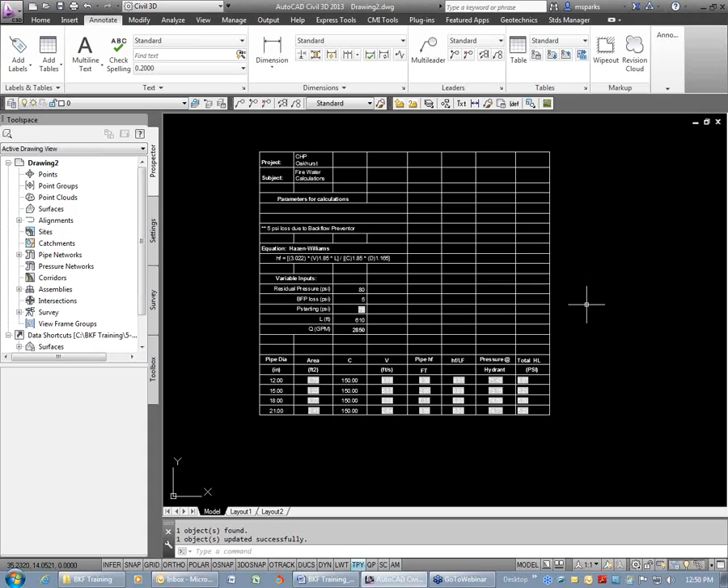Okay. So for the remaining, it looks like about 10 minutes here, I'm going to talk about CMI Tools, some of those functions and why that might be useful in Civil 3D to help you do certain things. So again, let me close this drawing, not save it. Not worried about this one either. Nope. Okay. You guys have probably seen this to death now, but I've created some extra entities in here to kind of show you around a little bit.

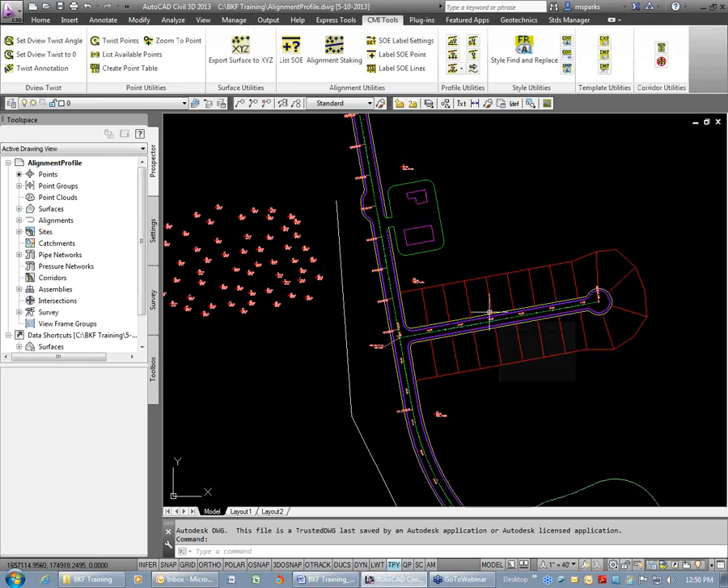So there's just some nice little utilities that will definitely help you do certain things. For example, you'll see that there are some DView twist capabilities here. And I forgot to put some text in here, so give me a second.

And you can see I can't spell very well, but too bad. Okay.

What I'm going to do is pretend that this is a viewport, and I want to show this road in the viewport. A lot of times you want to rotate that viewport, so you use DView twist. But with DView twist, you have to know the angle, or you have to kind of approximate. So we have this little button here to set a DView twist by picking 2 points on the screen.

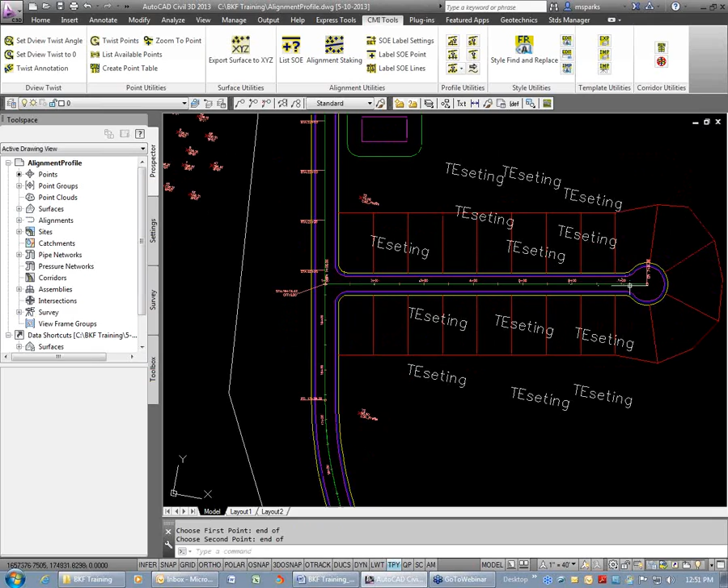So a couple things that it's nice that it does: take a look at my crosshairs after I'm done. So I say from there to there, that's my X coordinate, right? So it rotates it to that line that I just picked, and notice that my crosshairs are now set to that angle. So if I do ortho or text, I can do the ortho thing and have it be correct. Okay? So that's kind of a nice little feature. If I set the twist back to 0, my crosshairs go back to 0.

Now, if I'm just dealing with AutoCAD text and I'm not doing annotative and I want to rotate this text to that angle, again, it just has to be AutoCAD text. That's where this twist annotation comes in. So if I go to twist annotation, I want to rotate each one individually. So I'm going to hit return for that. And I'm going to grab all of those guys. And notice what happens to the angle of that text. I should not have picked everything, should I? Okay.

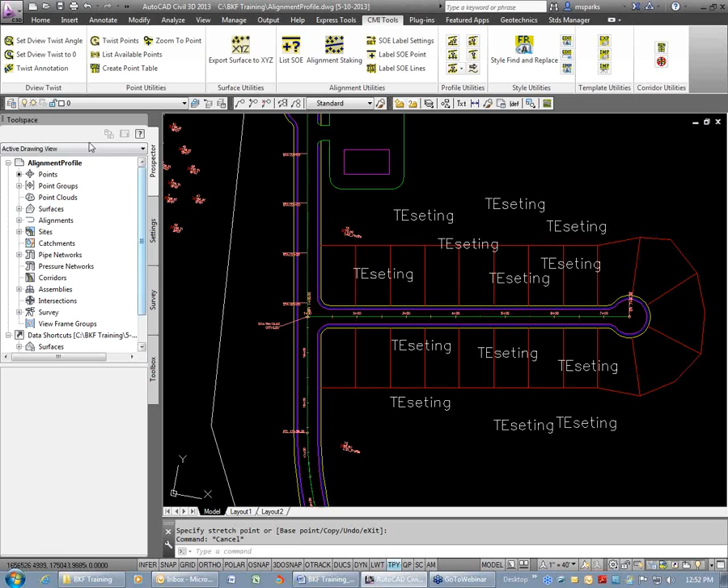So it rotates to whatever my current DView twist is. So it's kind of a nice little feature for certain text. Now keep in mind, if you want it to rotate automatically, you can have annotative text, or you can have the Civil 3D text do that automatically. Okay. So a couple nice little cool ones. I like the DView twist one quite a bit.

Okay. All right. Dealing with Civil 3D points, if you need to show those, what I'm going to do here is I need to show these points based on a station and offset of this alignment. Now you can do a point table in Civil 3D. So there is that capability, so I can add a point table. I'll show you something really fast here. And I'm going to pick all points just to show you what it looks like. Okay. So that's a point table in Civil 3D.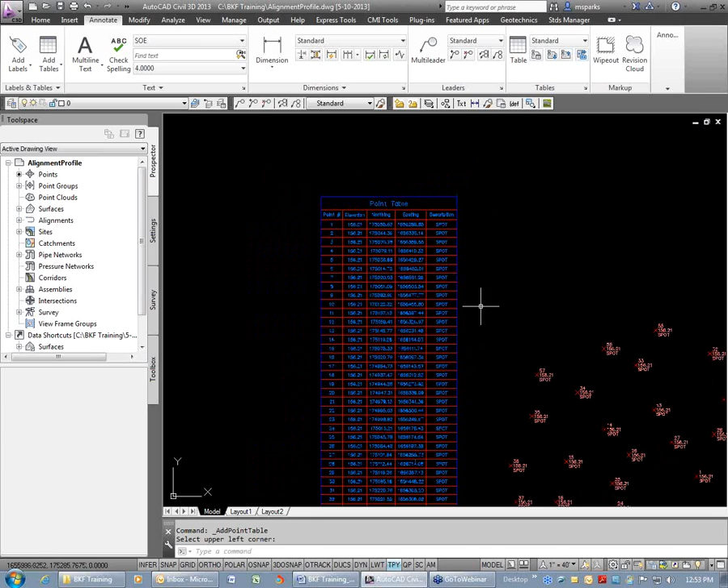Ours does it a little bit differently. It doesn't do it as smart as this one does. It doesn't use a style. It just uses text. Okay. But we have the capability of adding a few more things. So I wanted to at least show you that. So when we create a point table, we have the capability of using a station and offset of an alignment. So sometimes that's useful. And you can also export this to Excel. But I'll do a create in drawing.

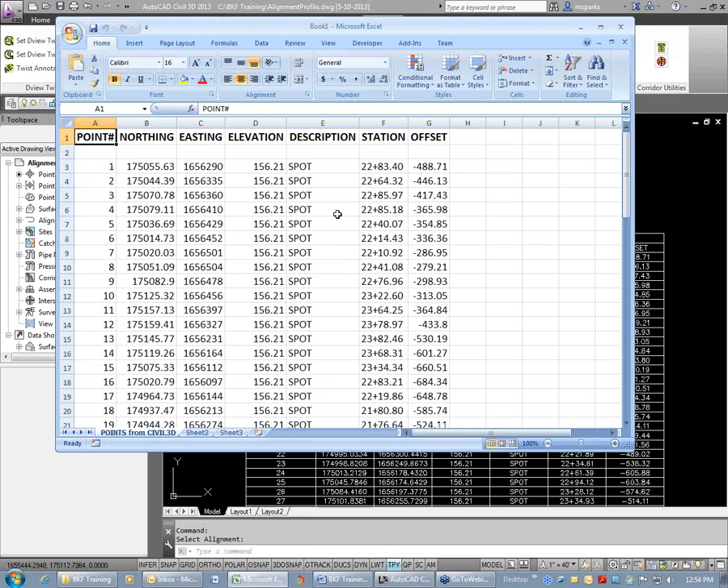I'm going to go ahead and select my alignment as Main Street. That's what this one is. And I'll put it right here. So this one, again, is just text and lines, but you now have a station and offset. If you want to do it the other way, where you said export to Excel, you can do the same thing as well. It'll open up Excel and put it into that. Sometimes that can be useful to you, little things like that. Okay. Kind of nice.

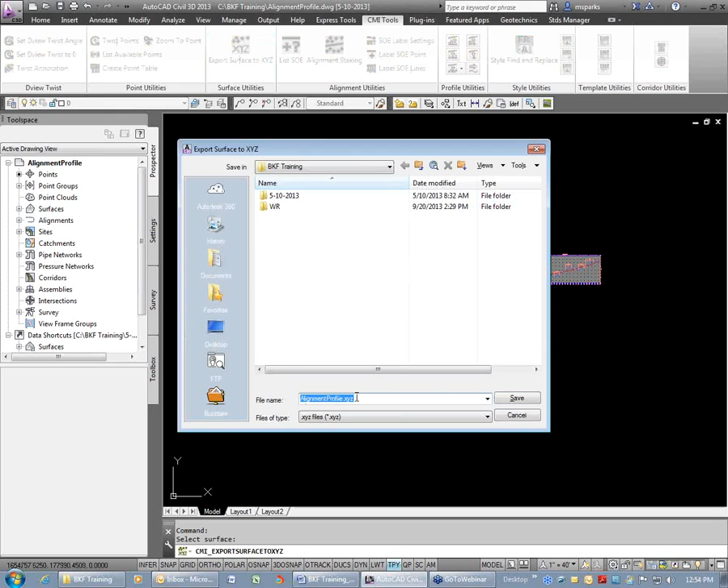Okay, briefly there: the export surface to an XYZ file. If you're trying to transfer this surface to a GIS program, a lot of times it might be some kind of ArcGIS or what have you. A lot of times they need those files. You can actually pick on this thing, and it'll export to an XYZ file, just XYZ coordinates of the surface, so you can define that pretty quickly if you wanted to do it that way.

So by doing that, create an XYZ file, and I'll show what it looks like. Oh, of course it's on the other screen. XYZ. And then that way you can import that to a GIS program, or hand that off to someone else using MicroStation or what have you. Sometimes that's useful to do. Okay.

All right. So a couple of utilities. I got about 5 minutes here, so I'm going to briefly talk about some that I think are important. So the alignment utilities I think are good, and then style utilities can be very useful.

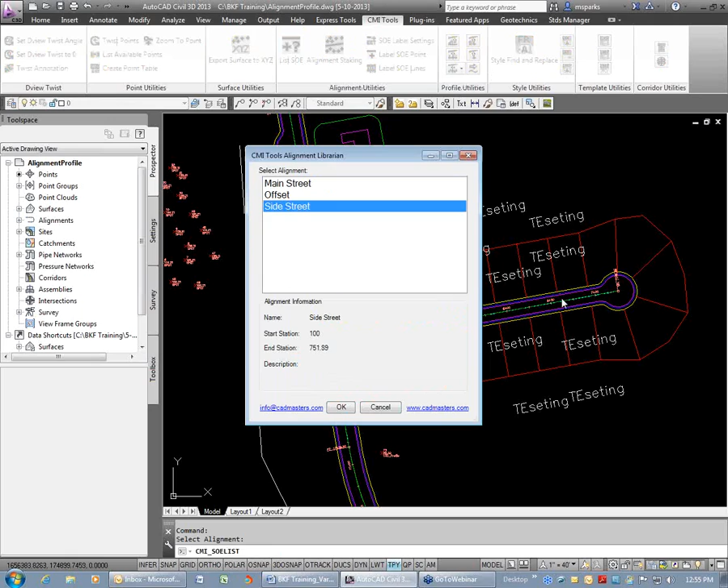So if I want to list the station offset elevation, I'm going to go ahead and pick basically on the plan view. So I'm going to select the alignment as side street, which is this one, and I'm going to list the FG, which is the finished grade. And wherever I pick, you'll notice here it gives me the station offset and the elevation of the profile and the grade on the profile.

So if I pick a point, say right there at station 237, it's giving me a grade of almost 3%, and that's because I'm in that realm of the 2.98. So again, you can do some listings without having to go both ways. So wherever I pick, it's giving me whatever the grade is and whatever the profile elevation is wherever I pick.

Okay? In addition to that, if you're doing some of this stuff, you can do some labeling along these. For example, when subdivisions were around and subdivisions seem to be coming back, you have to label every single one of the lot lines based on like a top of curb elevation or a back of walk elevation. And so what we can do here is we can label it one at a time, and then based on a profile, if I happen to know what the grade is and then a distance in Y, or I know what the difference in Y is, or I can calc it this way.

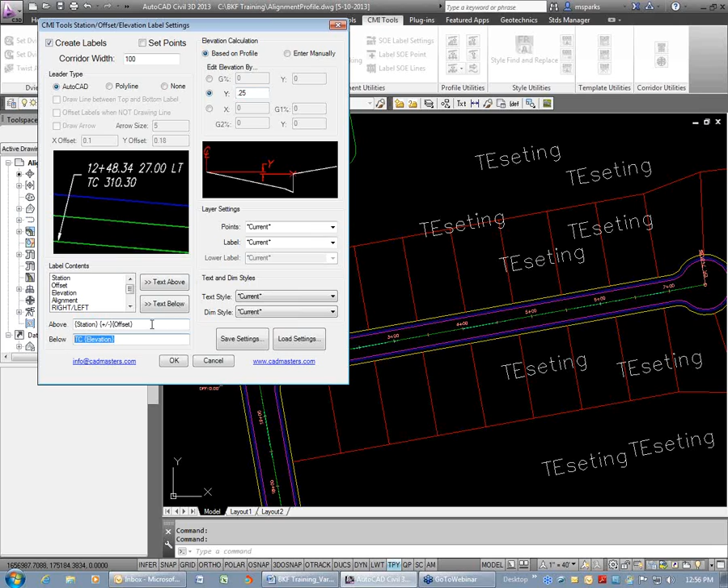So let's say I happen to know that from the center line to the top of curb elevation, it's 0.25 higher, just making that up. And you can see what the actual label looks like. But by doing that, now I can label a point or a set of lines. If I just do one point, just to show what it looks like. And I want to label this point right here to that. So it labels it that way. It does the calc for me.

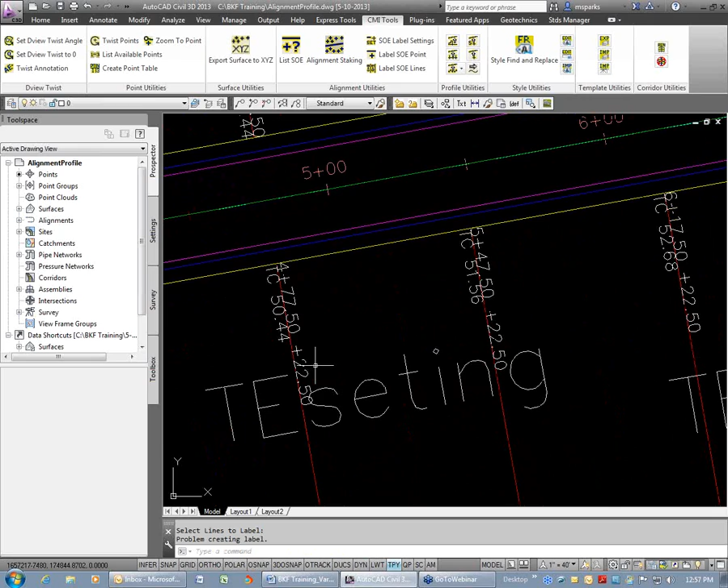Keep in mind that it's just dumb old text and a leader. So it's not using the Civil 3D side at all. But if you're trying to do this, sometimes it could be useful to at least have something in there. And the lines one is kind of a nice one, just to show you that one. Label lines. I'm going to label all the lines to that at the same time. So it comes and labels each one. Okay. So there can be some use in that as well. But just to kind of show you a nice couple of features as well.

So I got about a couple minutes here. There's some profile utilities where I can shift the profile. I can mark a point on a profile by just picking a point in plan. A lot of these things are mostly self-explanatory. Okay. But these two here, I can create a profile from a 3D polyline and points. I can always go the other way in Civil 3D by creating from a profile. I can create a 3D polyline, but I can't go the other way. So I've drawn this little 3D polyline here, and then I have some points.

So if I create a profile from a 3D polyline, it's going to ask me to select the alignment that it's going to be linked to. I want to put it on the Main Street one. Select the 3D polyline, and then what profile style I want, and do I want it to be labeled, and whatever I want to call it.

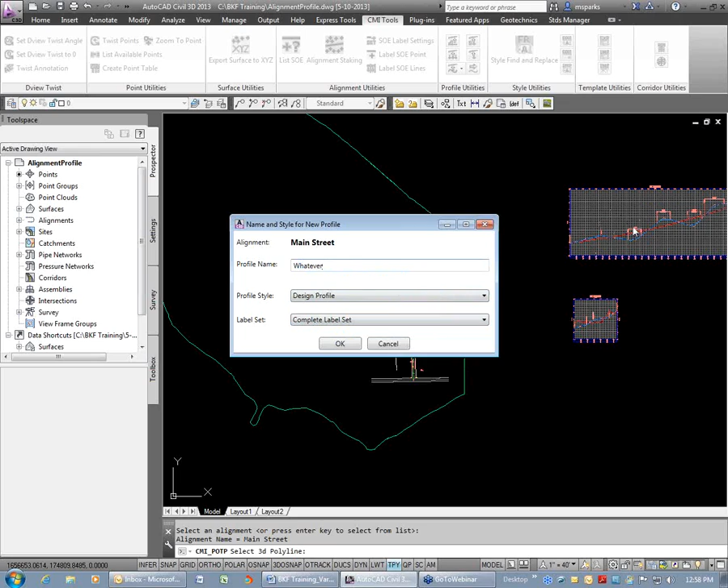And so you'll see here it gets projected onto that based on the elevation of those 3D polylines. It also gets labeled. So now I have a profile for that, which then can be used in a corridor or what have you. So if I want to go from points or from a polyline, I can do that instead of having to do that manually. Sometimes that's pretty nice. Okay.

And these guys here, where I can actually find and replace components of styles, edit all styles, prefix, suffix, I'll explain that. Edit all table styles, or I can import styles from another drawing. Now keep in mind that's a very similar command to the import styles in the Manage tab. So this was written before this existed, so that's why it's there. So it's not as needed as much anymore. But these guys here are kind of nice.

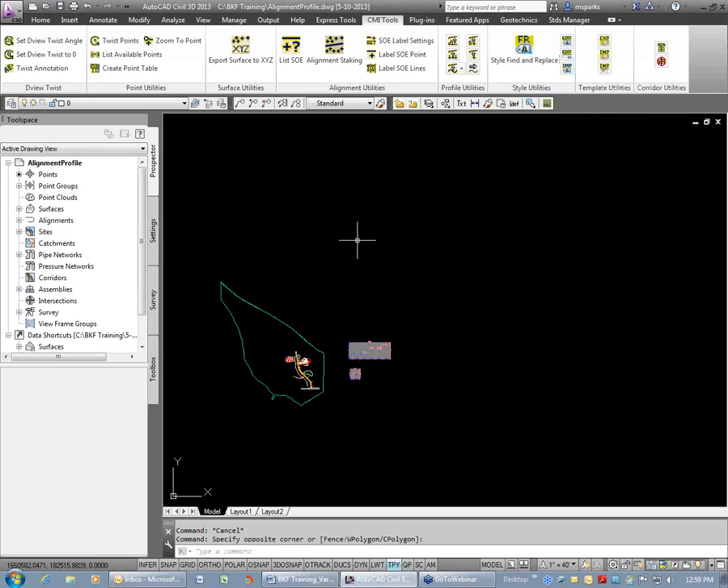For example, let's say all of a sudden my standard changed, so I'm going to make a new text style called change, and the new text style needs to be Arial. So all of my labels need to be changed to Arial for Civil 3D. Okay, so all I did was make a new text style called change. So you can see in here all this text is all still simplex.

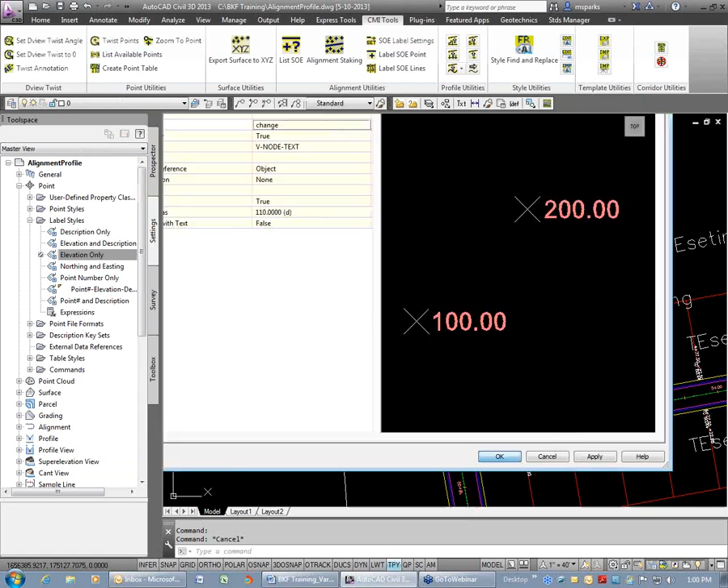If you've ever tried to go through here for each of the label styles, you'd go into one label style, come into the general tab, and change the style. Okay, now I only have 3,000 more to do. What's nice about this feature is you can find and replace based on that.

So what I'm going to do is search either layer, text style, or block. If I see a text style and I'm searching for standard and I want to replace it with change, if I hit find here, it's going to find every single style that has that particular property value, all of them. There's a few of them, yeah.

And then I hit replace. Are you sure? So you can kind of see behind the scenes it's going through each one of these and assigning that new text style. Okay, looks like it's done.

So now if I go to any one of these, you'll see now it's using change instead. You can even see it in the drawing as well. So to be able to do that kind of thing is definitely a nice feature for doing mass changes in styles.

Same thing if I want to edit all styles. A lot of times what I like to do here is go ahead and pick styles. In this drawing, I'm going to hit pick styles, and for everything for the alignment, let me uncheck all, and for alignment.

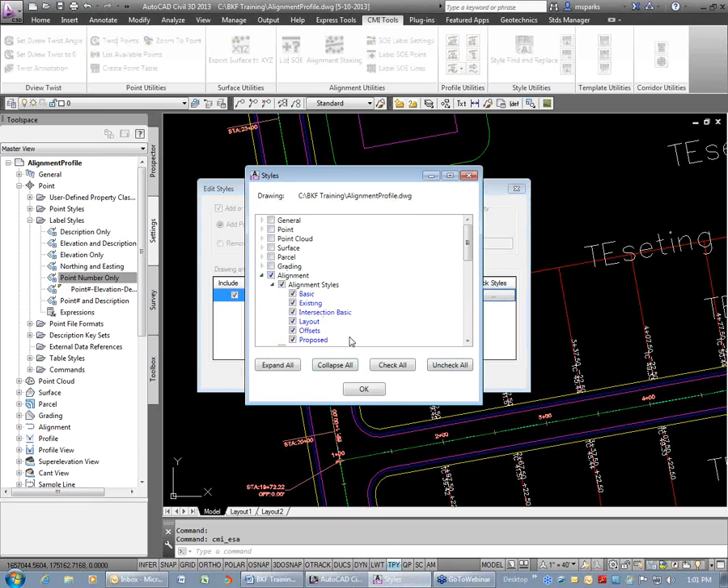As a company, if you're making a standardization, a lot of times I like to rename these and give it a prefix. So I'm going to put a prefix of CMI dash, and I can also change whoever made it if I want to give my name to that.

So what that does is I just did this for alignments. By doing that, where's my alignments? See, now I put a little CMI in front of every single one of these. So what I can do is quickly have a drawing and put my prefix in front of every single one, so I know that I've made those modifications.

And there's some other ones too, like edit table styles. If you want to edit every single table style, what properties do you want to edit the text settings for every single one of those? Make sure that the text is wrapped. All these things can be done for every single table style. So there's definitely some good options there.

Okay, I just looked at my time and I'm a little bit over here. There's also two other ones I'll show you. You can export object layers and import object layers. For those of you who don't know, when you go to drawing settings, all these object layers can't transfer over either if you use manage or even if you drag and drop.

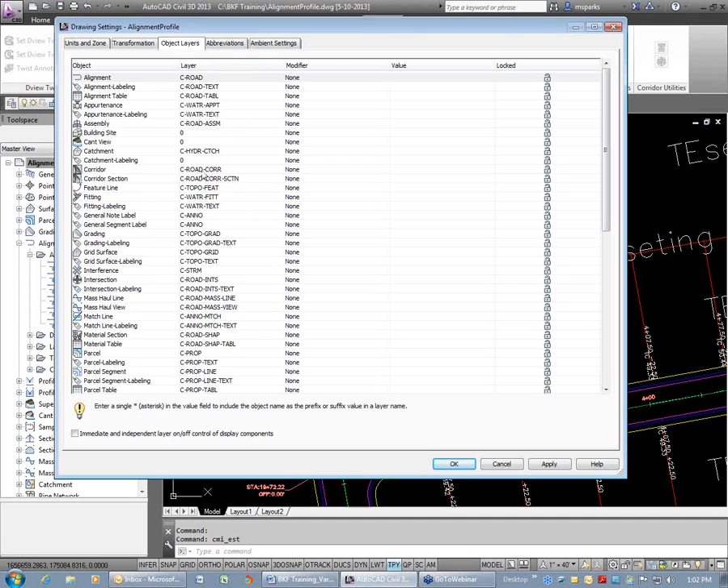So now you can export these to an Excel file and bring them back into another drawing if you need to change the layers. Like if you receive a drawing from somebody that doesn't have your layer scheme, you can do that now with this functionality.

So to kind of recap, we talked about the annotative objects, hatch entities, data linking through Excel file, and last but not least, we had some CMI tools done as well.

So if you have any questions, please do not hesitate to, maybe, I don't know if you have this or not. Let me do this. I'd probably do this every time, but I can't even spell. Did I do it wrong? I did.

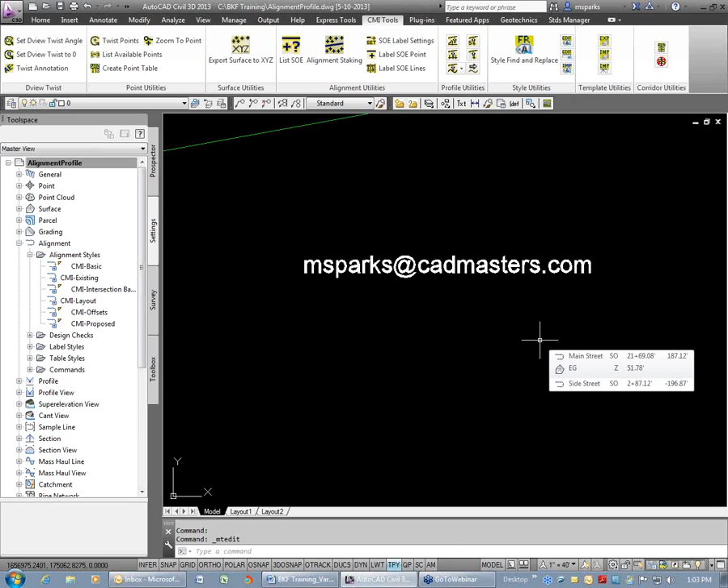Grading and some of those styles were done way back when. If you want a refresher on that, I don't mind. Whatever you guys want to talk about. So hopefully this was somewhat informative, and next time we can even be better. So I'm going to go ahead and stop.